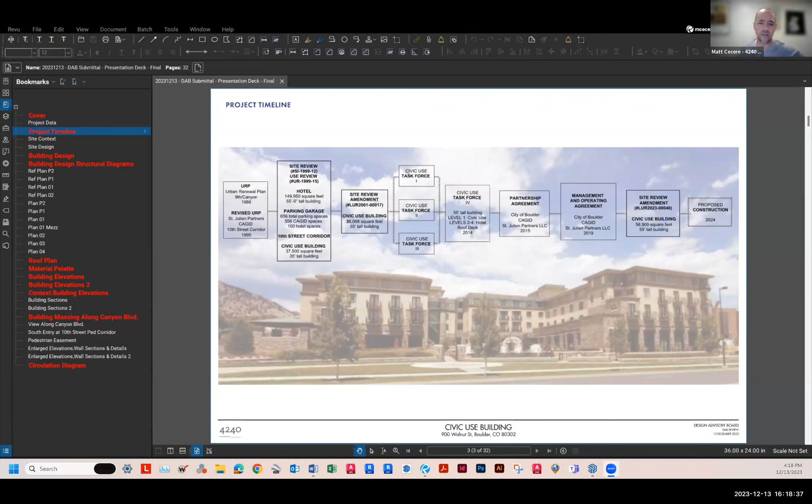So hopping into that a little bit deeper, we want to talk about the program. There's a lot of information here, but focusing on these elements, which is really just the program: the building is approximately 55,000 square feet with a 6,500 square foot conference room. Supporting that, we have pre-function support spaces like warming kitchen, restrooms, and storage at the ground level, and all of those are also being supported by the main hotel.

Above that, at levels 2, 3, and 4, the upper levels are 39 guest rooms. It's worth noting that the height of the project is identical to that approved civic use project in 2002 and in 2014, and that is 55 feet. That's the same as the existing context, and that level aligns quite well with connecting buildings and the urban design.

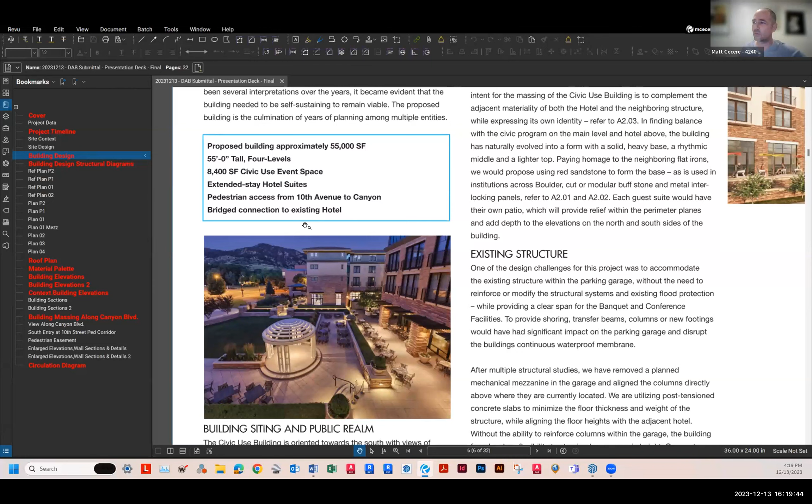So what we're showing here, we didn't submit this, but we thought it would be a good way to explain more about where we're coming from. This is nestled into the downtown urban fabric, and really what we're trying to do is figure out how to nestle into that fabric and work with the existing structure.

There are two major challenges we had to overcome. Looking at this structure, you'll see all these columns in the garage level that are roughly on a 28-foot by 28-foot grid. The clear span for the conference facility up above is quite challenging, so we had to come up with unique ways of dealing with that.

If you look at the diagram above, this is looking at the floor slab, or the civic pad that everyone can see today. What's worth noting is that we're in a flood zone. This is really the second key challenge, so how do we deal with that?

We've already dealt with that from the beginning, but we can't change that facade or access to it without essentially demolishing it—we'd have to restructure this whole portion of the garage. But we have maintained the existing connection at the 10th Street corridor, and we had planned for the civic use building from the get-go with an exit and entry here that we're maintaining for this design as well. So those two points are worth noting.

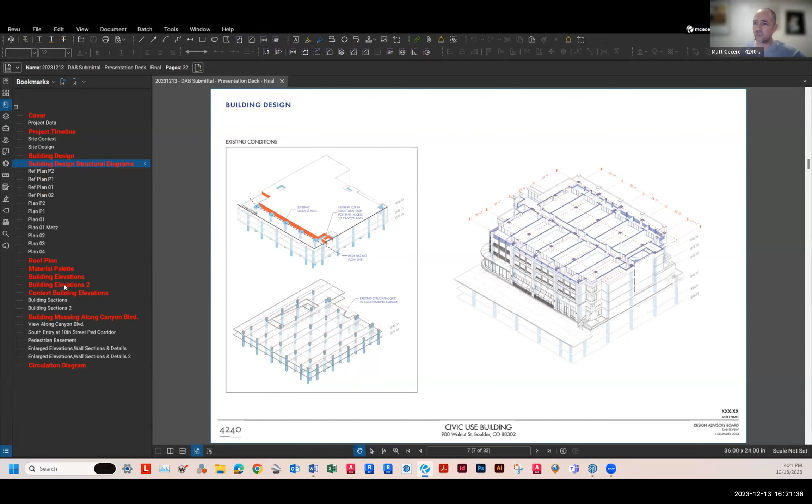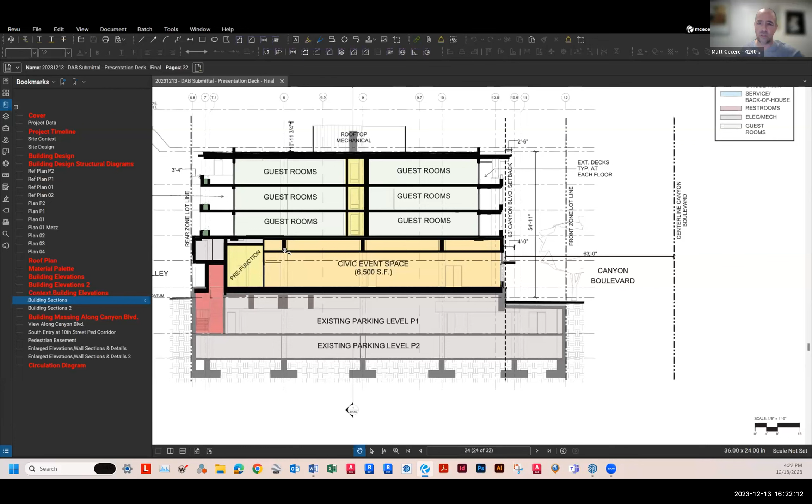I wanted to show you the pedestrian passage, this pedestrian easement here. Getting into this urban realm, we wanted to understand how to maintain what we have but enhance it. This passage has been very active over the years, but it's just had this concrete pad next to it. So we're looking at shifting that easement over and creating a really vibrant space—you can start to see this whimsical, dynamic arch passageway influenced by precedent imagery up above, which helps create this connection.

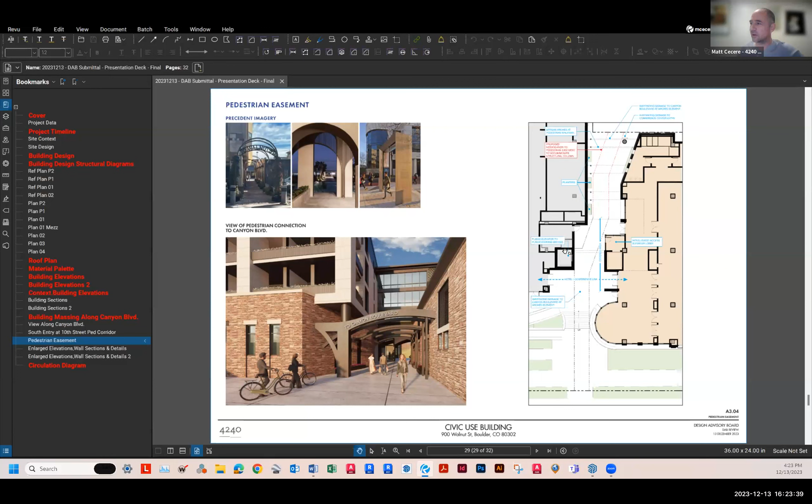This gap is articulated between the two buildings, creating a clear separation between the original St. Julien and the St. Julien Annex and Conference Facilities, the civic use. We're looking at this as a confluence of energy: pedestrians from Canyon Boulevard can come up the stairs, pedestrians from Walnut come here, guests from the hotel can pass across, and the public can come up through this elevator here.

I'll show that in a larger scale—you can see this diagram. If somebody's entering the hotel, they come to the lobby here, and if they want to go to the conference facility, they can pass outside undercover and come into the annex. Conversely, they could come through 10th Street, either side, come down, across, and into any of these entries depending on their purpose. Vice versa, off of Canyon, they can come in here too. That was something you requested of us, so we wanted to provide that diagram.

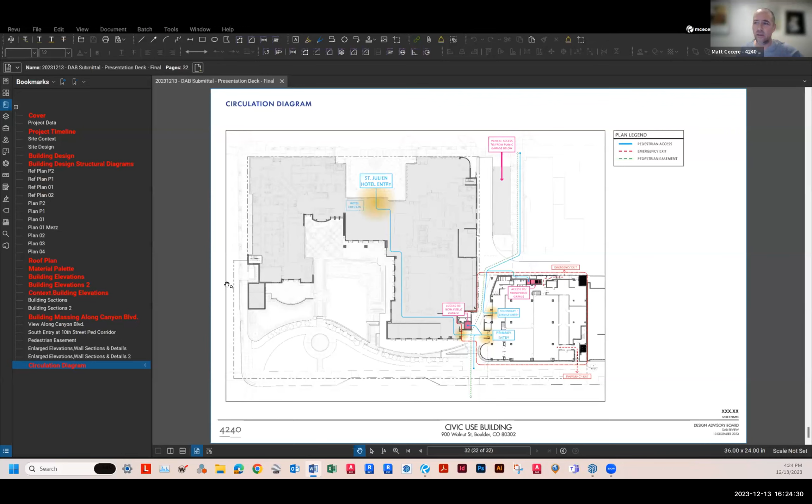It's worth noting that the primary entry is on the west side here. There are secondary entries, but they're really primarily for service and for egress. Now I want to move to building elevation 2.

Or I'm sorry, hold on.

The context building - getting into the elevation and thinking about the articulation of the facade, what we've been saying is we want to nestle this into the fabric and make sure that it is born of the site, born of the context. So I'm going to zoom in here and look at that context and elevation.

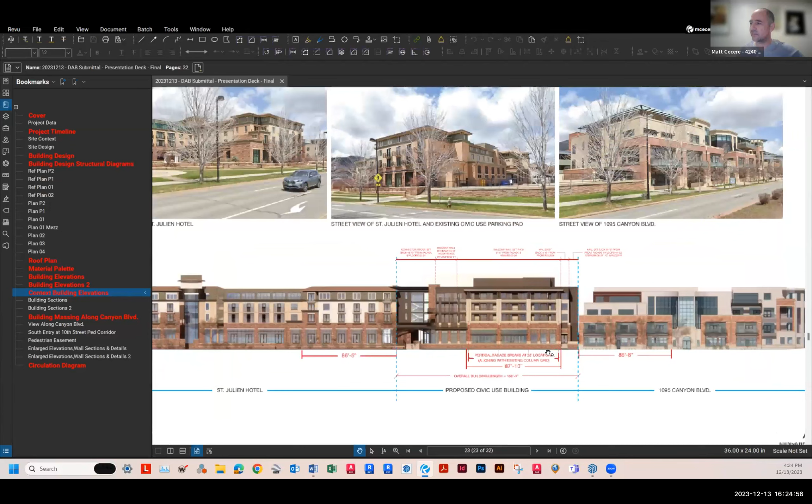So on the left is St. Julien Hotel. You can see a clear distinction between the base, the middle, and the top. And then the eastern neighbor has a very similar base, middle, top type of organization to it.

You'll see that there are 3 bays here that are 86 feet on the right and 86 feet on the left. There's a requirement to maintain 75 feet. We can't do that with the structural grid, but we're trying to stay in keeping with our neighbors. So what we have done is articulated this center bay that's about 83 feet, 10 inches wide.

You can see these step backs that we have. I mentioned that corridor on the left, that step back at the passageway. And then the balconies step back here about 13 feet. On the west, and then on the east, it steps back about 8'6". And you'll also notice, and this becomes important as we start to look at step backs on all sides, that we're stepping back on the eastern side to respect the neighbors' views.

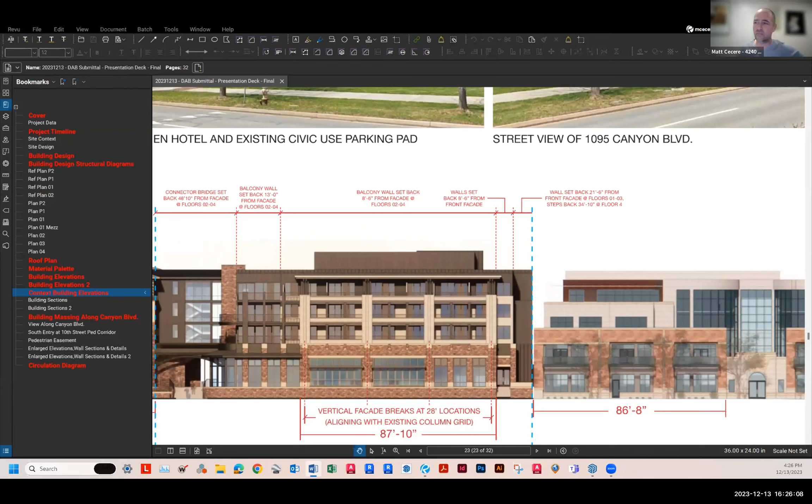At the upper levels of the north facade, it steps in a similar way. So let me show you that. Actually, I think probably the better view for this, let me pull it up. Sorry, give me a second to pull up the right one.

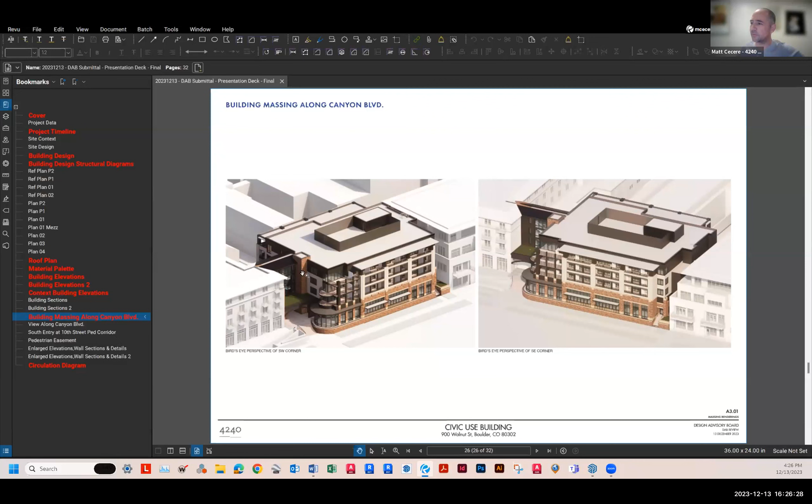This is just another view on Canyon Boulevard, both from the southwest and the southeast. And you can see how the building starts to erode away, if you will, for those setbacks to respect that. Also, you'll notice that this portion is a little bit more special because it's trying to signify entry. And then on the other side, we're stepping that back as well.

Going back to the north facade, this is a little bit hard to see in elevation. If we need to, we can pull up a SketchUp model and go through that. But you can see the stepping that we're doing here. It still has the base, it still has the middle, and it still has the top.

The base is largely utilitarian because that is the back of house along the alley, but we have tried to add windows and other expression that helps enhance the architecture at the base. And then when we get to the middle portion, that portion is stepped back - we add plantings, it's stepping back between 5 and 15 feet, depending on where you're looking at the facade.

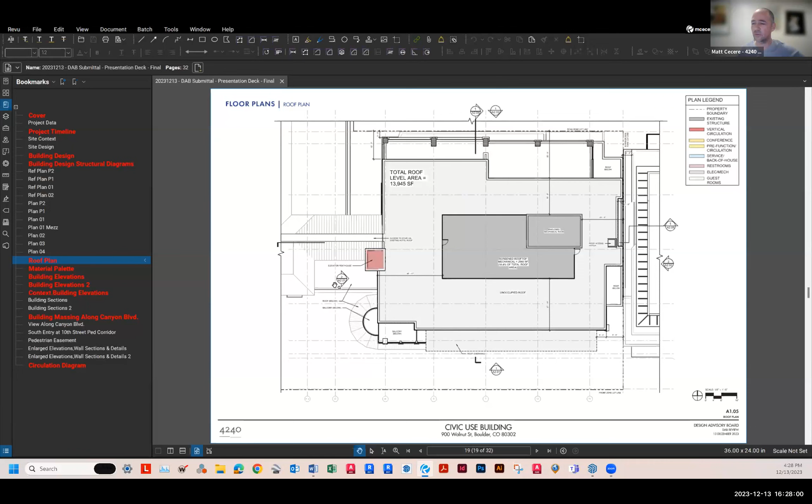It's either looked at honed or as cleft. And then at the top, we're looking at this metal panel - that's this zinc metal panel, again a very high quality product. So we really are enhancing not only with the articulation of the form and massing, but also with the materiality, this base middle top articulation.

And that can be seen not only on Canyon Boulevard, but this is really thinking of this project from all 4 sides, so that is even on the west side at the passage. And if we go to the next slide, we mentioned this already, but there's that base middle top on the north. I think it's worth noting that we're paying special extra attention to the east facade.

We're using high quality materials there as well. Where we butt up adjacent to the property line, there's a constructability concern. So rather than using limestone or metal panel or cleft stone, we're utilizing a high quality CMU, ground face and filled, so it almost looks like limestone, but it's CMU. That way, when we get to construction, contractors can build from our side of the property rather than the other side, with limited impact on the other side.

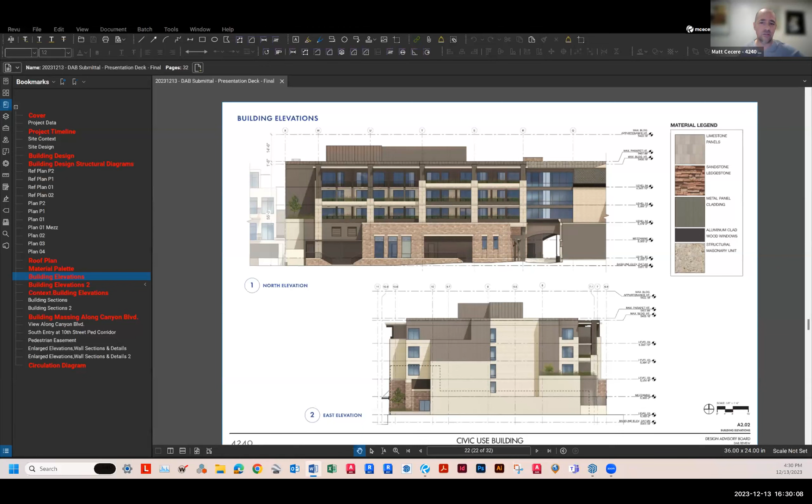So I think that is worth noting, and I think all of these enhance that base middle top. It's also worth mentioning again that in order to enhance the solar and visual access to the ground level, we've provided expansive glazing. We have this enhanced glazing, meeting the requirements, but perhaps even more important is that the conference facility is on the glass, and we don't just have glazing, we have folding doors, so you can open up that space and have that visual and also physical connection to the street.

And sort of the icing on the cake is that we're trying to introduce vegetation in the gaps where we have roofs that will be on top of the roof at the connector. I want to go back to the other view one more time. We also have that along the alley at the balconies and at the step back roof again. So I think that is worth noting.

Covering this at a high level, but for closing remarks, I think it's really important to remember that today's presentation is to focus on and address the design guidelines and how our building relates to those guidelines. In light of the recent correspondence from some adjacent neighbors to the east, we felt it would be important to provide some historical context and just wanted to briefly touch upon that.

This project was planned for back in 2002, and the project to the east was planned subsequent to that. Through their initial approvals, the building largely had a blank wall on their west facade, understanding that this 55-foot tall building would be constructed at some time in the future. Through their design review process with the city, it was recommended the need for a more articulated west facade, not knowing how long it would take for that proposed structure to be built.

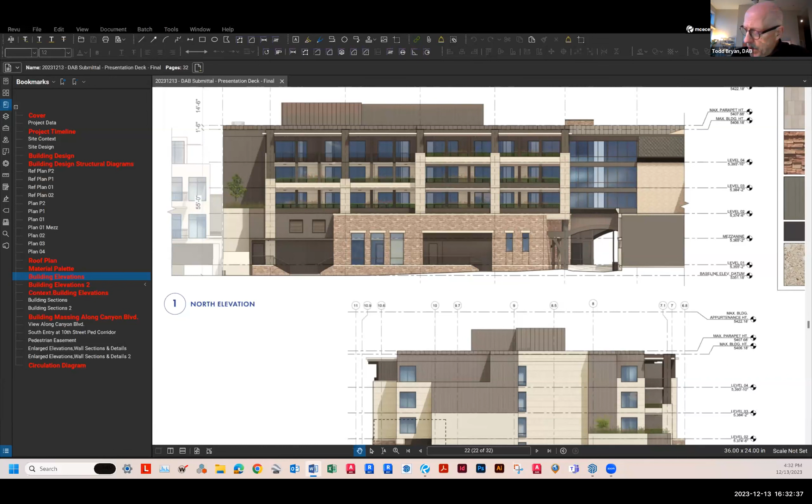Before we get into the Design Advisory Board questions and then discussion, I'd like to hear from the public, but before that, I think everybody probably already knows the kind of role that DAB plays. When I say DAB, I mean the Design Advisory Board. Just for review, DAB is an advisory board, which is kind of in our name, and we review architectural design features that are at the request of the planning board and the city council, related to criteria contained in the downtown urban design guidelines and the site review criteria. So that's what we review.

That's what Matt was talking about a little bit, going through this, is the kind of things that we're looking at, so we'll be discussing these as we go through, specifically two of them, but if other ones come up in discussion, those are ones we'll also talk about within our time frame. I think it's important to note that the DAB doesn't approve or deny projects. We really advise the staff and, in this case, the planning board on these design features contained within these guidelines. We also don't review engineering, zoning, or parks. But within the context of what we do review, we really welcome public comment, and to the extent we can, we'll try to address those comments within the direction we're given.

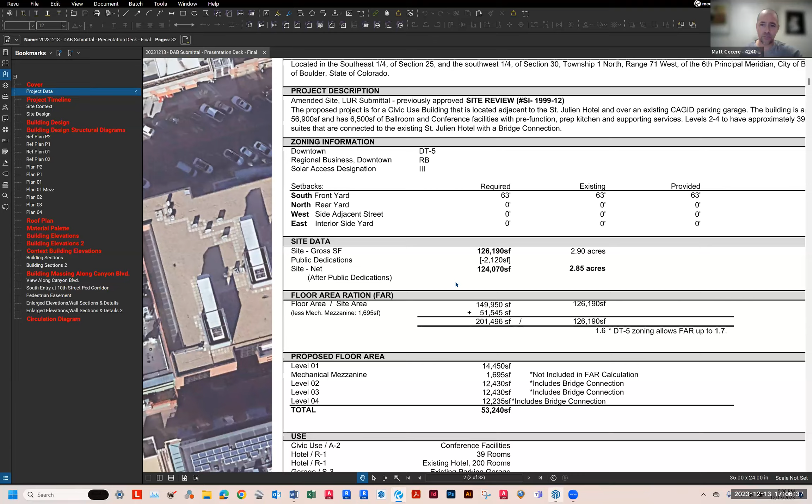Yeah, it's a little bit hard unless I pull up the screen, but essentially - do you want me to do so? Okay, sure, do that, give me a second. Let me pull up, I'm actually going to pull up our model and spin this around a little bit.

So this is the model. We grabbed your context and put that all into place. And what you'll see when you really look at this in 3D is that the building is set back wherever we can do it, so we have this corner set back. For instance, let's say a view from one of the terraces in that corner - they still get light and view. There's still a setback, even though we have the use by right to go to a zero setback.

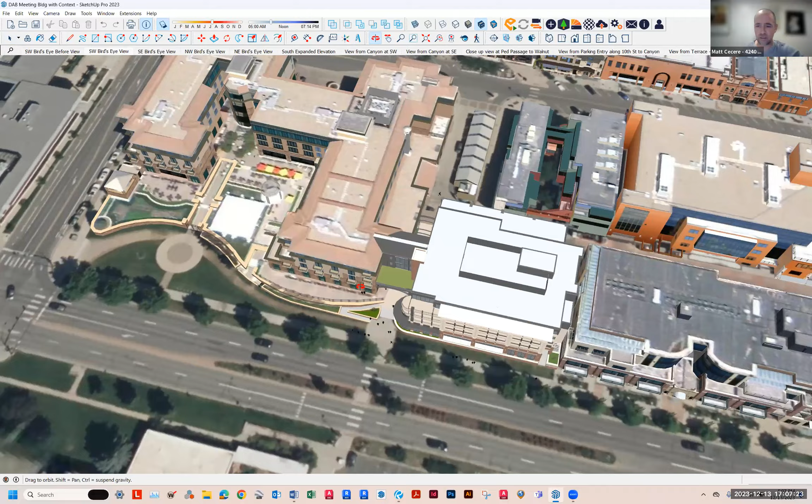So they still maintain a view of the Flatirons. They still get light and view. They still get ventilation, especially at the southeast and at the northeast corners where they are cut back to maintain those views and maintain as much separation as we reasonably can, given the structural complications we spoke to earlier.

And Matt, would you have any sense of how much you guys are giving up in terms of square footage and property value by not building out your full build out? That's a great question.

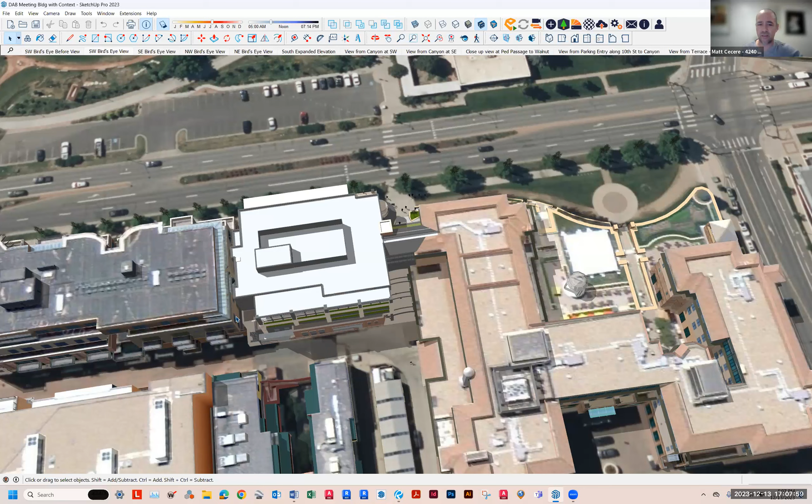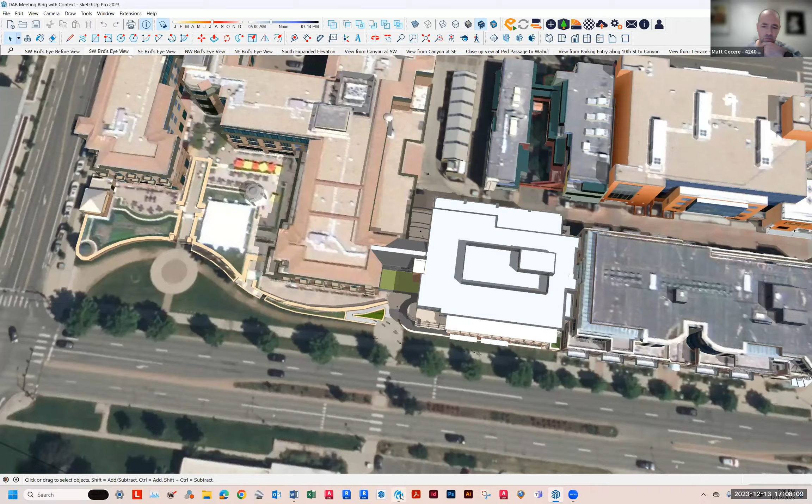We haven't - Jen is on the call as well - we haven't identified the exact loss of square footage, but Jen, I don't know if you have that off the top of your head. If not, I can identify those in plan here, or actually I'm going to switch back to the other diagram. I think this might be a little bit easier.

But you can see this corner is cut out here and then that corner is cut out there. If I were approximating, we're probably about 350 square feet per level on this corner. And it's reduced here - probably about 100 to 150 square feet per level at that corner. And then we're set back here, which is probably about 2 by 25, so that's 50 per level all the way up.

Okay, thanks, sorry I'm doing public math, Stephen. Sorry, I apologize, but that's approximately what we're losing by creating those setbacks.

Okay, great. Any other questions for Matt? Clarifying questions that maybe weren't picked up in the presentation or need more clarity from DAB?

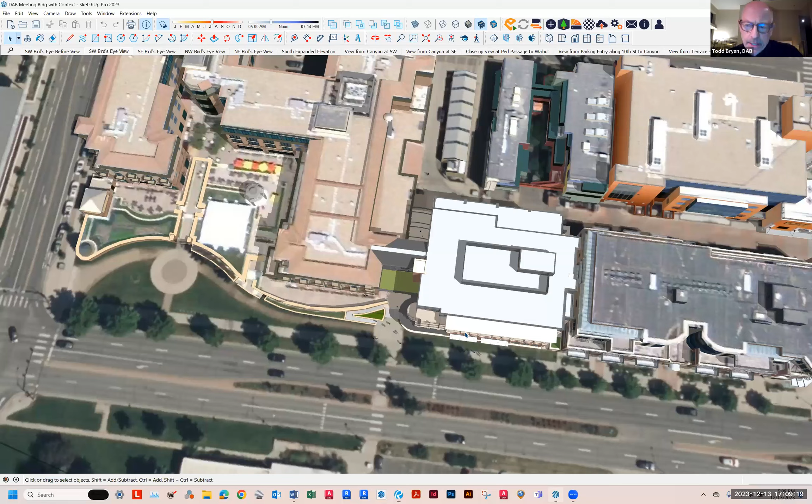I do have one question that Matt, you may be able to answer, but can you go back to that kind of roof view of your building and then the one to the west? Sure, okay.

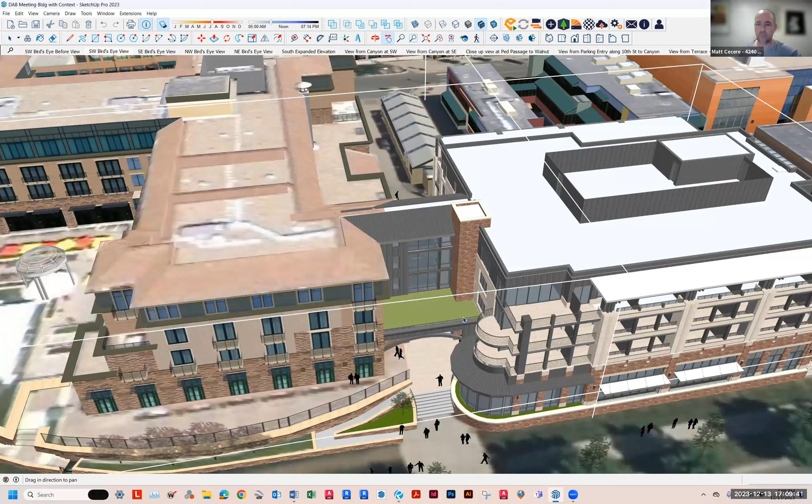Yeah, move over a little, keep going. I'm sorry, east - I'm looking at the roof view of the building on the east? Yeah, east, yours and the one east of yours. Okay sure, sorry, I got my directions mixed up. It's all good. It's a Midwest thing.

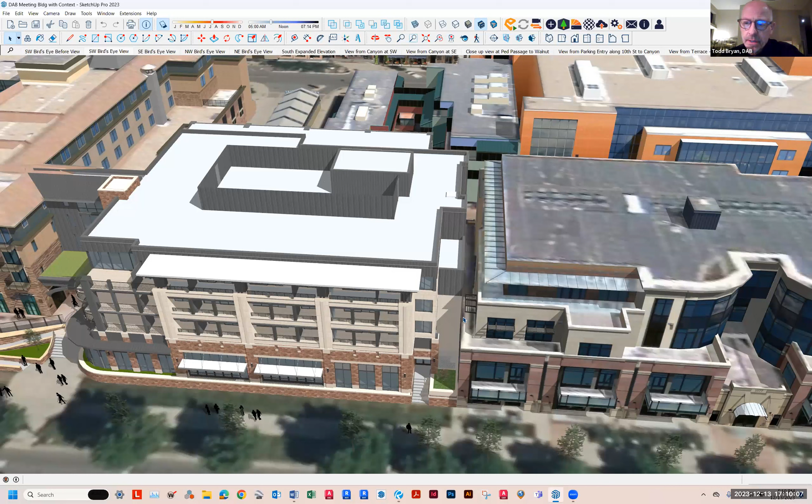So my question is, the units in this 1077 building - when people were talking about the potential impact, some of them were facing west, some of them were facing north, and some of them were facing south. So can you tell by the roof, are there units basically facing north and units facing south? Are there just two units per along that floor plan on their building? In other words, is anybody only facing west?

Is it that one? I do not know the answer to. Bruce or Jen, I don't know if you know if there's a unit centered along the west that's only facing west.

I have not seen a floor plan for levels 2 and 3. I've only seen a few of the commercial spaces below, and I do not believe any are fully west facing, but I could be incorrect in stating that.

Okay, great, thank you. Any other clarifying questions from DAB?

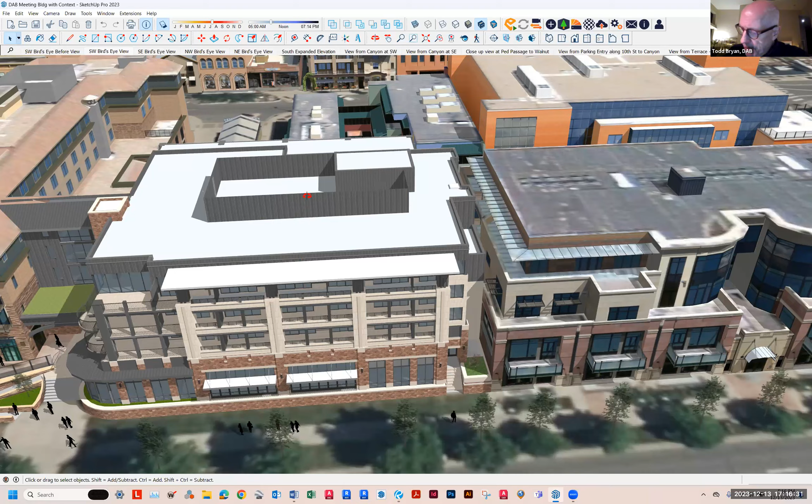So we have two issues that we've been asked to review. The first is Downtown Urban Design Guidelines 2.2C, regarding the maintenance of human scale rather than monolithic or monumental scale, on the south-facing facade. The other issue is the site review criteria regarding entry points that are not within 50 feet of each other.

But before we get into those two, I'm wondering if DAB members have other criteria they would like to discuss that they think are relevant to our discussion?

Yeah, Todd, I do have one comment. I think to answer your question, there was some attention and description of the alleyway facade included in the applicant's presentation, but I do think as we're walking around we have two main issues to cover. If we can just have a brief discussion about circulation as it relates to the alley side, mainly for pedestrians, I'd like to get a little more familiar with how people are going through this circuit, diagonally through the buildings there.

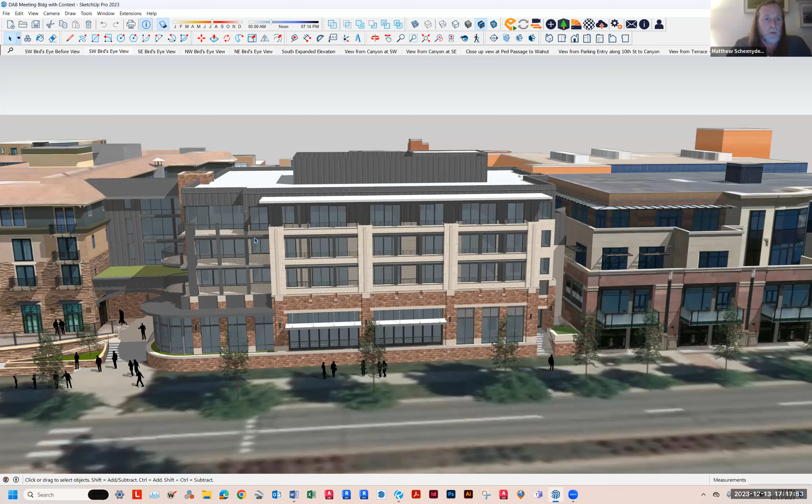Not being completely familiar with the backside of some of the architecture just north of this proposal, I think it might be helpful to get a walk through the model and understand how that works spatially. But again, in terms of material and massing, it seems like adequate attention has been given to that facade as a principal facade, not as an afterthought.

Okay, any other specific criteria that the DAB members think we should talk about? I have two, and I want you to tell me whether you think they're relevant. One is 2.2B and the other is 2.1B in the design criteria. Is there a way that we can pull up those two criteria? Is that from your side, Todd, or did you want us to pull that up?

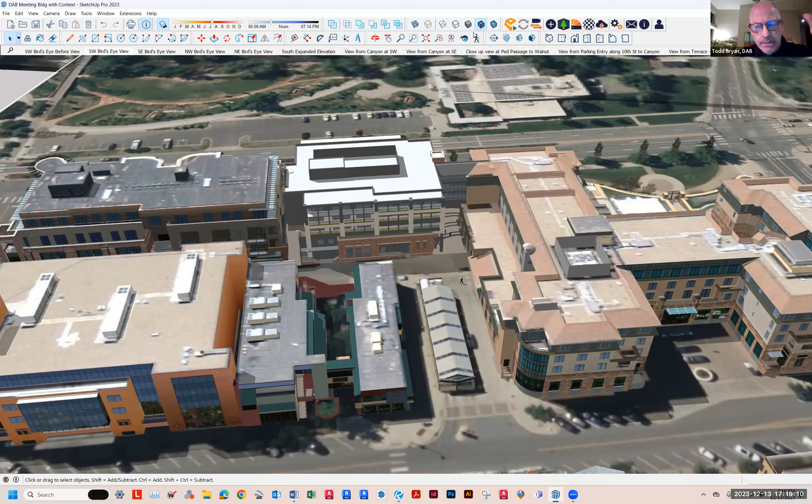If you have the design criteria that's actually in our packet, do you have that? Or Jen, can you pull those up? I'll stop sharing. I do not have that packet up, I have our checklist pulled up, so let me look for that document. Or Shannon, is that something you'd have readily available? Pull that up. Thank you very much.

It's giving me, I'm having it load right now, Todd. So if you can continue on the other ones, I can still pull it up.

Okay, so while we're pulling that up, if it's okay with DAB members, I'd like to start with the second issue we're being asked to review, regarding the defined entryways. Matt described the constraints they have regarding the building and the floodplain, so that these two entryways at each end of the structure are more than 50 feet apart, under criteria H3A, Roman numeral 4. Are DAB members comfortable with that added distance, or do you think there's another way to do this?

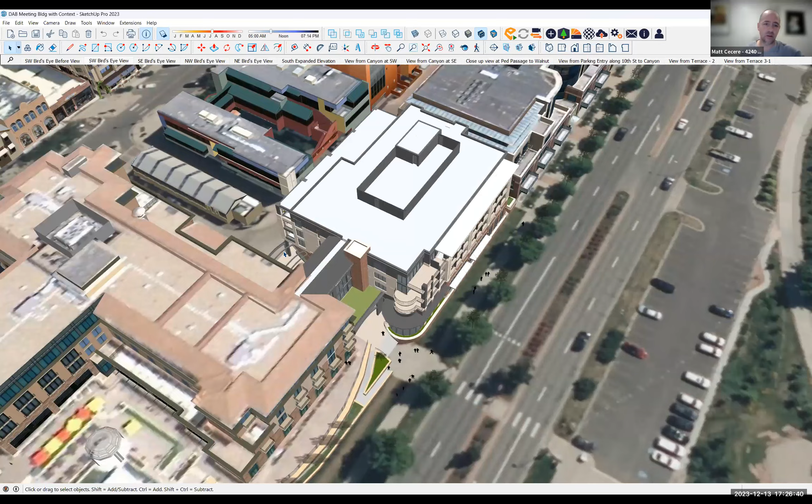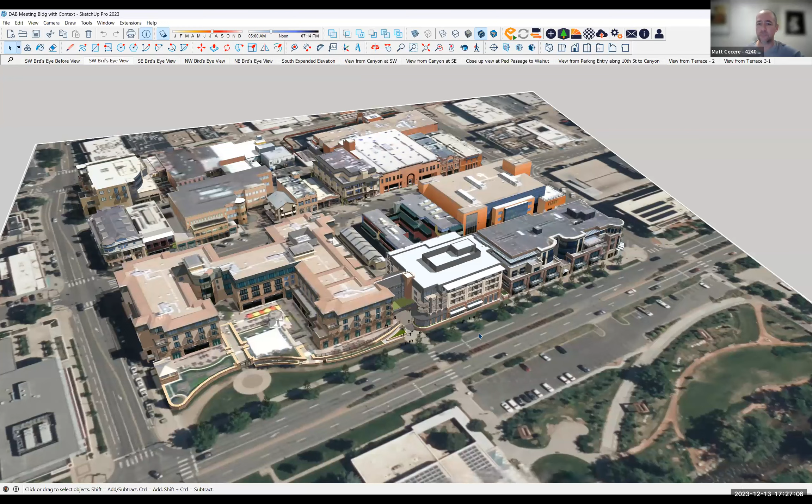And I'd add, Matt, that if somebody were taking an Uber or Lyft or rideshare otherwise, they would be dropped off at the St. Julien, or perhaps further down Walnut. There are a few options. I mentioned there's sort of a spaghetti of circulation, but to Jen's point, there can't really be any car access off of Canyon. It's simply perhaps pedestrian crossing Canyon or coming along the sidewalk. Okay, thanks.

Yeah, and I just wanted to add that it's interesting the way Boulder has interpreted flood rules, because while they are federal rules, they're mandated locally. In other words, the local municipality actually has jurisdiction to override some of them, and if there were certain circumstances, they could do that. Hence New Orleans, right? You would have nothing there. And so if there are moments that wanted to be done and you guys wanted to push for that, that would be within Boulder's local jurisdiction. They've been reluctant to do that in the past. They sort of dig their heels in the ground with floodplain issues, but that is within our local world if we wanted to do certain things.

So getting back to the question about these two entryways, DAB members, are any of you uncomfortable with the distance, or can we put that one to bed?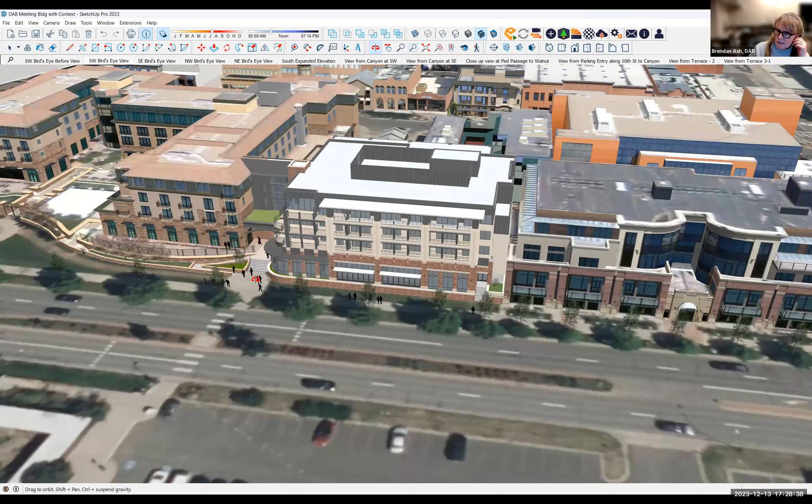Well, I think that there are a couple of questions within that question, not just the distance of the entry. I think that the entry that's on the east on Canyon is primarily egress. I think it is appropriately set back from the street. It's not a primary entrance. It's not something that we want necessarily people to be drawn to as an entry. I think that having that curve feature and the wider stair is inviting to where the entry naturally wants to be.

The only concern I have is there's that roof element that's happening, sort of setting up the arches going down that promenade, and it's kind of created a spine and a wall that's severing and blocking, maybe hiding the entry doors. I'm wondering if there's a way that that spine wall could be shortened, or the doors could be pulled out so that they're more visible, so that if you're coming around that curve, you could actually see where the entrance is. And there's 2 sets of doors there. It's a little bit confusing.

I think that sheet R1.01, the site plan, shows the 2 sets of doors, but the double doors are definitely more prominent than that single door, yet it's kind of being hidden by that spine wall. So I would suggest somehow making that, is that roof element necessary? Is there another way that could be treated as celebrating the entry to the civic space instead of blocking and hiding it, but making it a little bit more prominent?

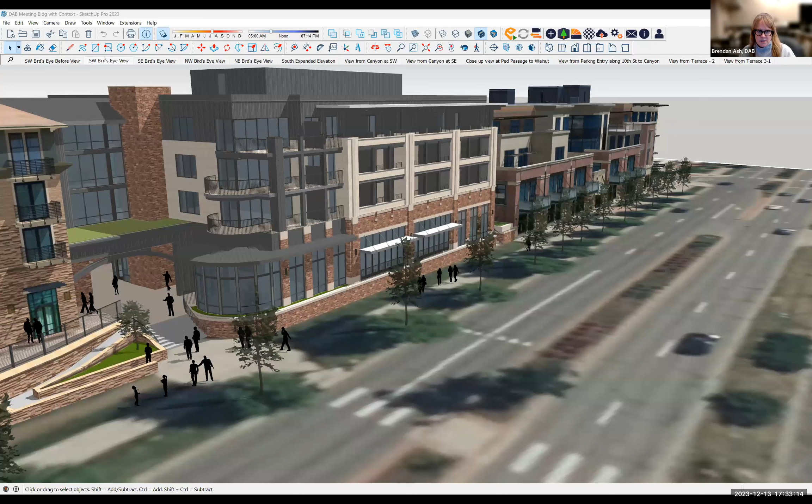I'm talking about the south side, underneath the operable doors and windows with the Juliet balcony. With the white awnings that we're looking at sticking out in the floodplain, that straight flat stone wall sitting underneath the window bay, if there's a way to bring that floor line down, tier it with additional landscaping. Right now it's just showing a patch of flat grass. I'm wondering if there's some way to integrate the planting beds like you can see on the St. Julien side, just west of the stair.

I don't know how to draw on this, otherwise I'd point it out. Can we draw on this? There's the annotate button at the top. So it is drawn. Oh okay, it is. How do you do that, Stephen? Where did I see it? At the top, it said annotate. Of course, now I can't clear it.

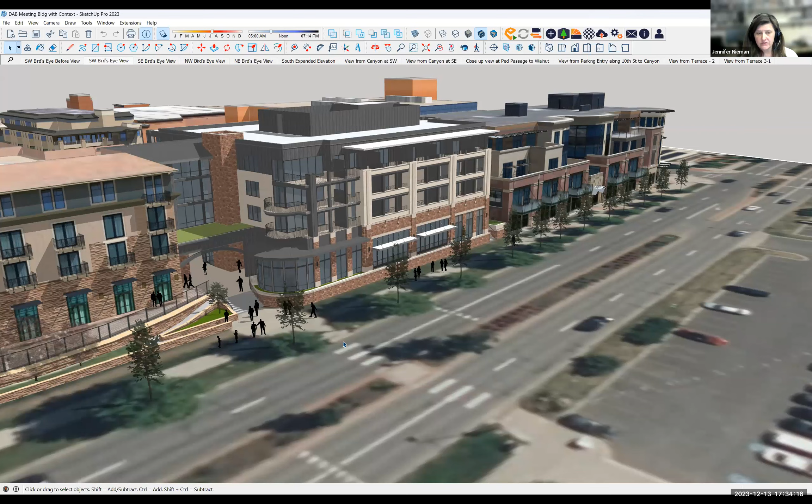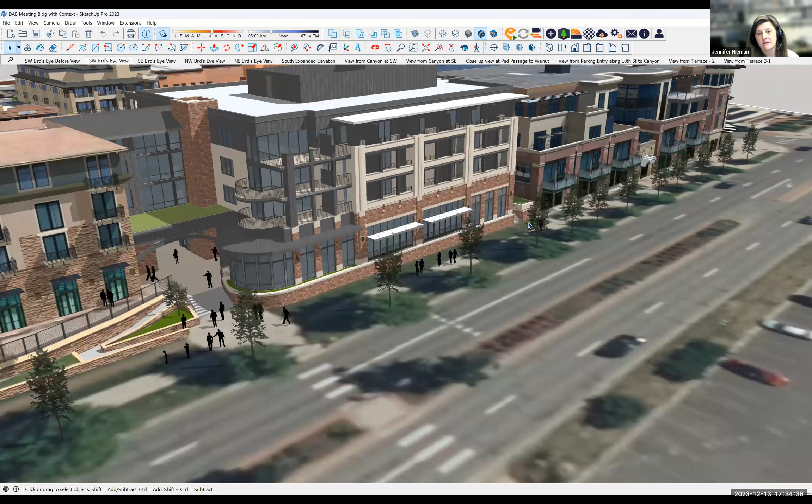So that is considered the high hazard zone. We have reached out to traffic and researched what landscape would be available to put in that area. We were told we're not allowed to plant anything that would disrupt floodwaters. So we might be able to get away with some minimal grasses, but shrubs and lots of plantings, I'm not sure if that's something we'd be able to do. With regards to fixed planters, we've talked internally about stepping back windows a foot or so so we could have draping plants that go over that wall in that corner. How can we articulate softening that corner with more of a landscaped edge, but we're very limited on what is allowed within that turf zone along Canyon right now, based on the high hazard zone.

That is something we're looking into, just to help break up that long wall. I'm looking at this nice landscape island - if that was possible to have some type of tiered landscape bed to break this up. This wall is tall, and compared to a human, it's a big wall before you start the engagement here with these operable doors and windows. And then you have this planting bed, which doesn't have the same kind of human scale or interaction or whimsy that I think is really working with the St. Julien.

I would like to see maybe something like these planting beds over here pulled into this. This is pretty high up - it's not really something that people on the sidewalk can experience in any way. It's almost a story above your head. So I would like to see that maybe revisited.

That corner of the building is existing. That is parking garage below. Just to be clear, Jennifer, on Google Earth we can see this - the stone wall and the cast cap already exist, and that is essentially the deck of the parking garage. So that is structured below, correct? That is correct, that's right.

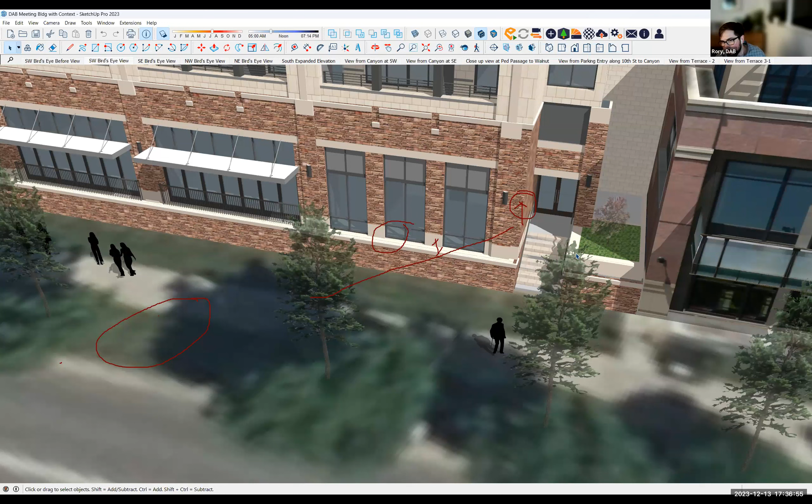But that was conceived for the original one when it was built in 2003 and 4. Are there any additional voids that were anticipated along that facade? No, there were voids for elevators further in the back, in close proximity to this one. And if you go down into the garage, you can see a lot of what's going on there, but nothing along the street.

So just for a second, I'll pull up the diagram that I showed earlier. This is really the only structure, so you can see that carve out for the stairs, and then this carve out here. Can you go ahead and stop?

Can you reshare? Oh sure. We're still seeing the model. Yeah, let me share the screen. Hopefully that will work better. Let's see, does this work now?

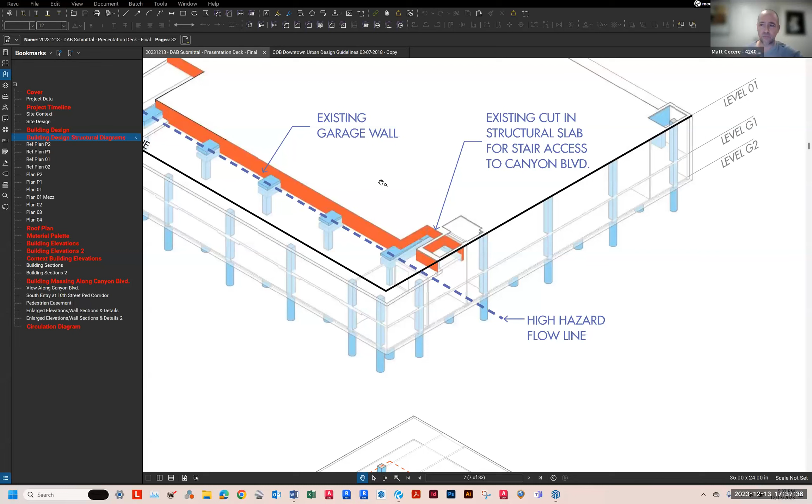Yes, okay, sorry. So these are the structural diagrams I showed earlier. That's the floodplain wall, if you will, and you can see the notch out for the stairs on the west side, and then this is a notch anticipating the stairs that we're talking about, and this cutout here is really for the garage exhaust. So if I go back to the other one, and let me know if you lose me on it, that is what is here.

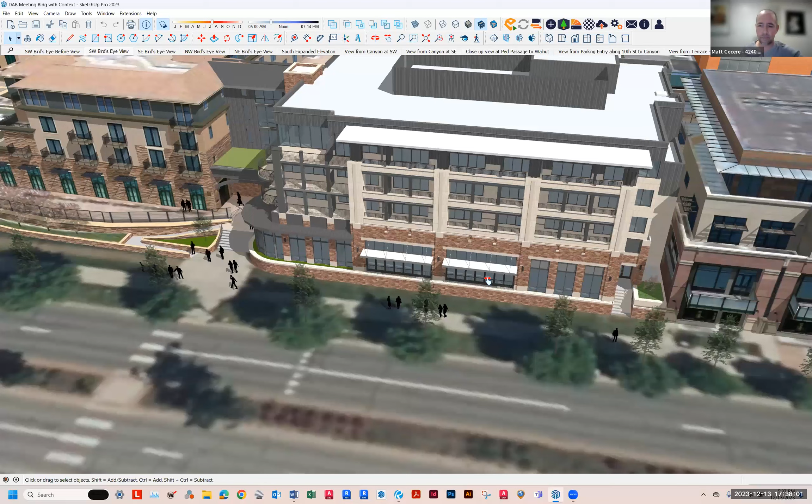So there's a question about garage exhaust. These are here, we're not moving them. We're working with them, and we actually saw it as an opportunity to help set the building back. So that is there, and then we have the planting in front of it.

One thing, Brendan, that you brought up is is there perhaps a way to lower this planting? So that's something that we can look at with our landscape architect and see how low can we get it and still make sure that the vegetation can thrive, but it's essentially sitting right on the slab.

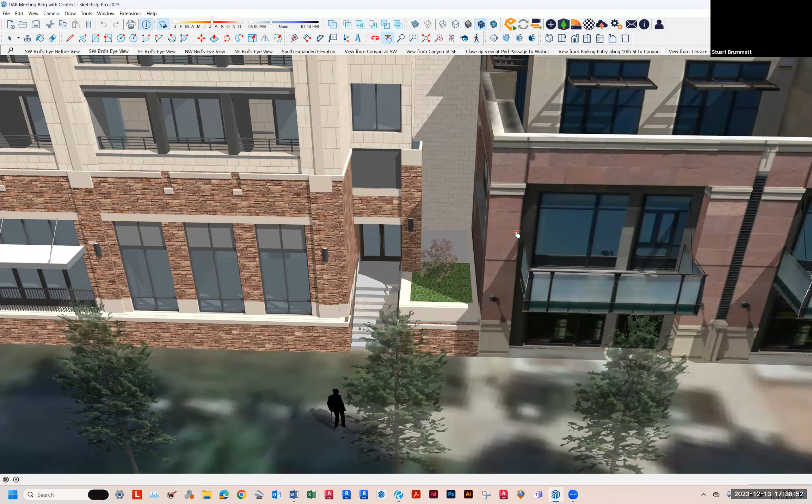It might be worth talking about the entry and how we've already internally discussed how we can improve the primary entry, and what we might do at that location to increase the intuitive nature of what entry is and where it is. We've talked about maybe introducing a vertical element outside of that fin wall you were discussing, a pair of, making that a double door, and maybe even paring back the curved room form so that that's not blocking the entry as much.

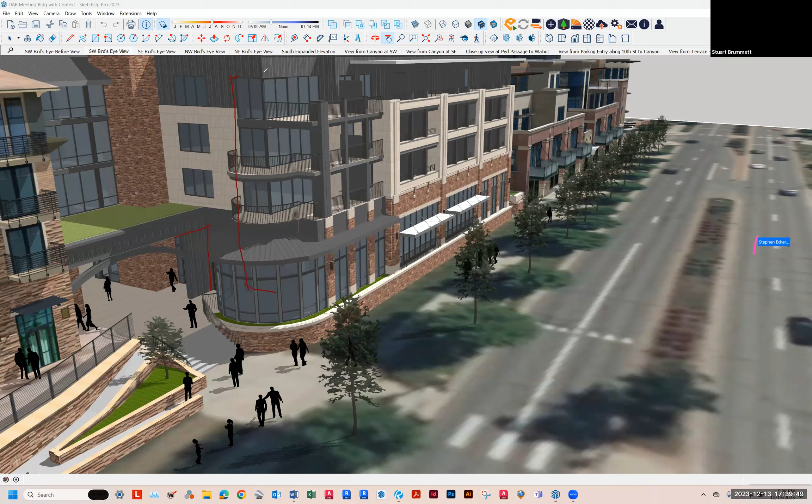And that is definitely something that we have been looking at, and we'll continue to do so. We agree that there's an opportunity there to increase the visual nature of what entry looks like outside of the covered roof, so that as you're coming along the sidewalk or canyon, entry is clearly denoted by the architecture, and that is something we will definitely be working on as we take your comments and make modifications.

All right, you're speaking my language. I like it. Yeah, Brendan, Stu, thank you for that. Brendan and the rest of the DAB, I'm doing these cartoon sketches, but we agree that this fin wall isn't ideal.

So subsequent to this, we've looked at strategies, as Stu has mentioned, to eliminate that. We're also looking at this vertical expression. One thing we're debating internally, we're not quite sure what the right answer is, but Stu alluded to it, is should this semicircular volume be so large, or if you can imagine in plan, here's the exterior wall, maybe this vertical expression comes through and this goes over, and then this zone can become outdoor space that invites people in. We're not quite sure, but it's something we think might be a good fit.

What we're trying to balance is what one of you mentioned earlier, that this expression signifies entry, and that's part of the reason why we did that, but it also blocks entry at the same time. So we're trying to find the right balance of signifying entry, but making it welcoming and open.

Yeah, I wanted to make a couple suggestions along the same lines. You could look at, and I don't know that this would help, but you could look at this roof actually, and this all sort of being one expression rather than so many parts and pieces. That could help designate that. And the other thing I thought I had was, could there be a way that some of these columns materially come down to help break up that wall?

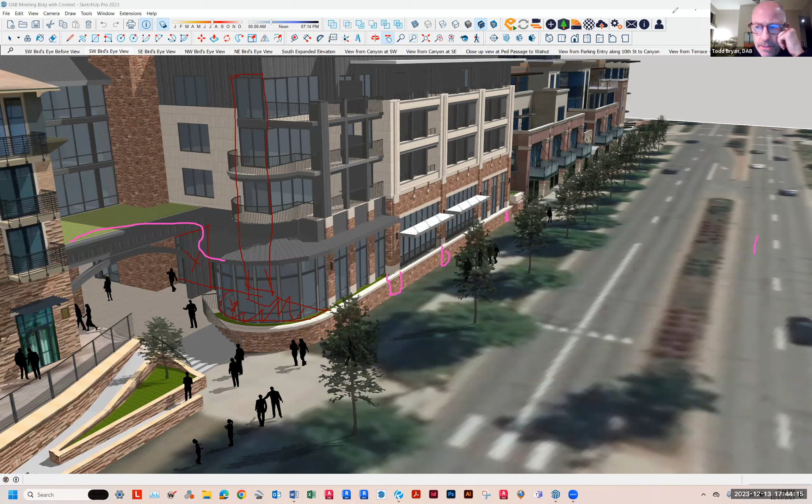I think you guys get the idea that's being expressed. Also, I really was wondering where the outdoor use space is for the Civic Center. And I think the idea of making the arch an exterior space instead of interior spaces would be a very interesting thing to explore. I think if you can spare the space programmatically from the inside, it could be a really cool balcony that's more engaging, but still giving that flow to the entry.

Okay, so is there a potential outdoor use space associated with the arch? Yeah, with the curve and the arch. Okay, so I would like to move on to this other question, because I think that's going to take more time, and we're at a shortage of time at this point.

I don't know if Rory or Matthew want to weigh in on this particular issue, or are you guys good with the recommendations we've come up with? I think I'm good with it. I mean, the distance of the entry, I don't think is really detrimental to this particular facade and its location. I think the fact that the east is actually egress driven is actually a benefit to the residential folks, because they're not having congregating right outside the residential piece.

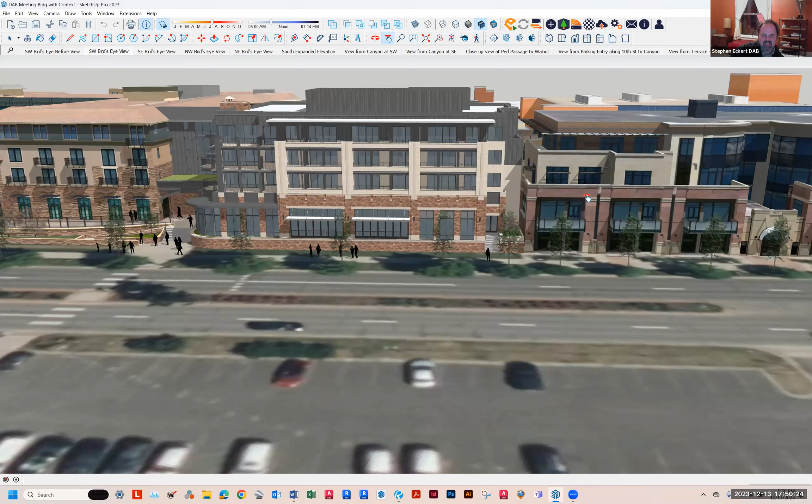If you could go back to that oblique view you were just at. Rotate it back. Yeah, right there, that's good. I think there's maybe a reaction to the massiveness of it, and honestly I think it's the way you've treated these balconies and these columns.

I think it could be more delicate, kind of the way the St. Julien has these balconies. I understand why you want balconies for these units, but I think it feels a bit massive. I'm not saying you have to follow this datum of the Arete building, but in some ways, if you did that and had the first level not having railings, and brought over this element from the St. Julien into this facade, I think it would push the building back from the street a little bit.

You'd still get your balconies, and they'd actually be cheaper, maybe. I think it would tie the St. Julien back, because this really is a continuation. That's just my thought. But I feel like it's especially these four big, massive, heavy columns that are flush with this front part that's making it feel massive.

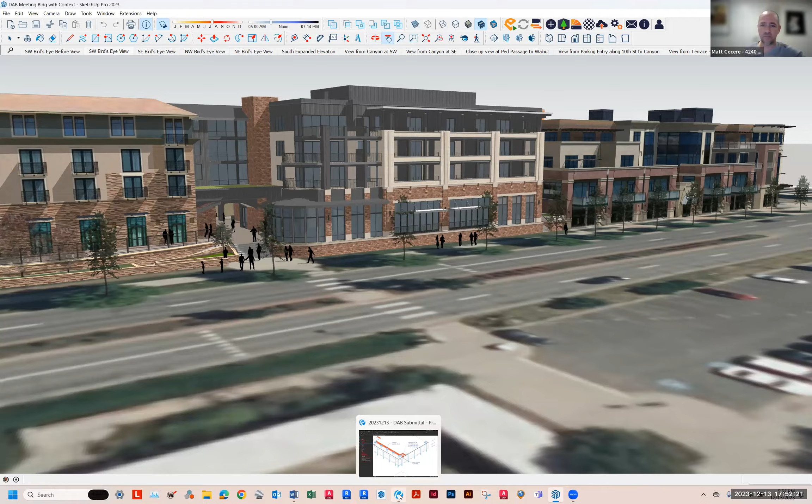Stephen, in DAB, do you mind if we explain that one? It's interesting because of the structure. Do you mind if we pull up something for that? Can you see this diagram on the screen? Okay great, so this is that facade where you have those frames, and this goes back to the structure yet again.

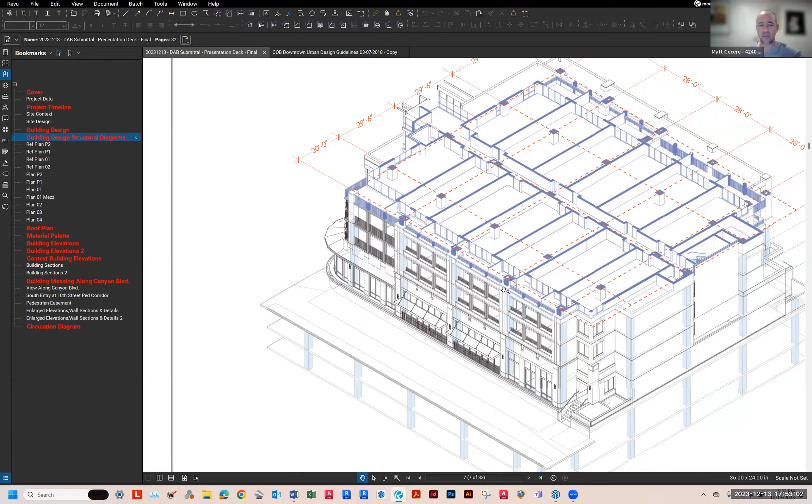So when you look at these structural grids, imagine these red dashed lines are essentially the beams—this will be post-tension concrete, but that's where the cables will run. There are columns at these four points, and this beam needs to extend to each of these columns, with a perimeter beam along the facade. I also wanted to show you the challenge: we have these columns, the facade is set back to address those setback concerns, but we're limited because of where the columns are located.

So we're trying to make each one of these columns slightly different. You don't see that on the facade, but when you look at the structure, you can see how we're reconciling those. So that became a great structural concern. There are some opportunities, for instance, on the corner, in theory we might be able to add a balcony, but that really doesn't take us in the right direction.

So what we said is, St. Julien is clearly a monolithic building. It has a base and a top, but is relatively flat. It has some projecting balconies that are light. The Arete on the east is more stepped back. It has carve outs, but also has projecting balconies. Can we marry something in between?

So we tried to take the tone of the stucco from the St. Julien and from the Arete and blend them together. So we're using the limestone, but then we made these very large openings, so it still erodes the mass as much as we reasonably can. We've had a lot of conversations internally about how narrow we can make those columns. We might get a few inches, but not much, because of the concrete columns that they're cladding. So I don't know if that helps describe the challenges that we have.

Yeah, yeah, that's really good. I mean, yeah, I totally echo, Stephen, what you were saying. My initial reaction was the same virtually.

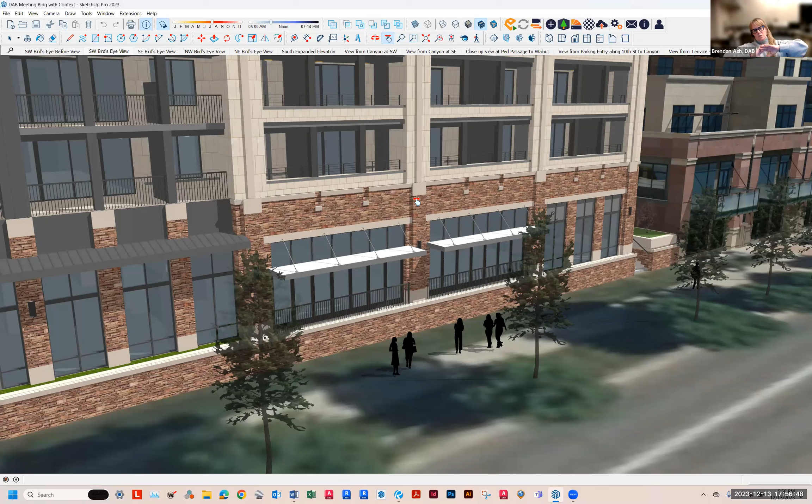For example, when you have a section cut through the balconies on the submittal packet, the detail blow up of that section cut doesn't have the stone, the partial height wall with the shorter balcony rail on top. It's actually more transparent rail. I think there's a tricky and weird transition between the cap of the stone at the base and where those balconies begin, that they're really almost in the same plane, and there needs to be more separation and more relief. Maybe looking at extending the balcony all the way down to the cap of the stone might help separate those. When you zoom out and look at Canyon Boulevard, there's a really nice horizontality along that whole street that is working, but there's sort of a lack of commitment once you start going up into the second stories, because it doesn't have even a slight bit of relief between the two facades, I think would be helpful.

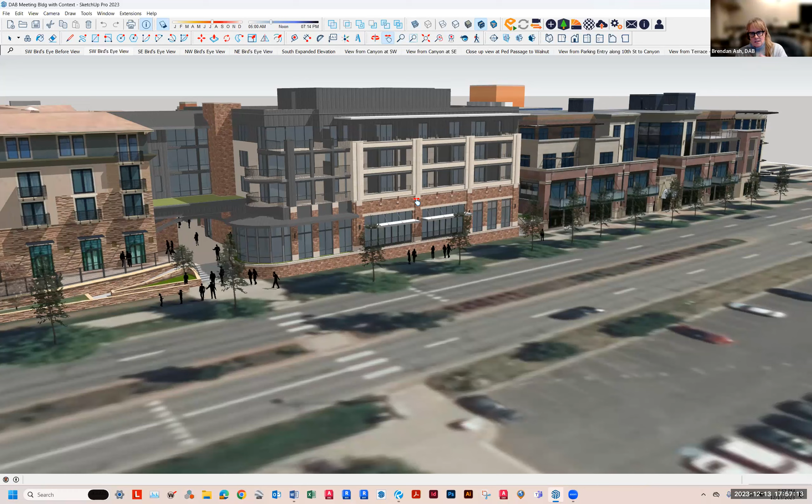Yeah, I mean, maybe did you guys try round columns? Not ornate, but just really simple round ones. You might be able to capture all of the structure you need within the round column.

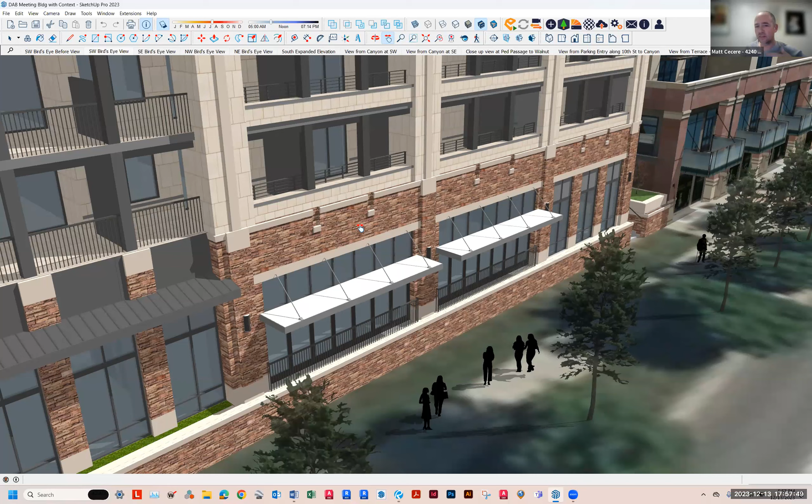Yeah, I don't know, I mean you guys are struggling with this, so... I think both of you are bringing up great points where, as I think maybe Shannon mentioned at the beginning, or perhaps Kalani, I can't remember, but we're early on, this is where we are. And I think there are good points about how much relief do you really need. Is it 4 inches? Is it 6? Is it 2 feet? Should this railing come down? How do we make it lighter? Can the columns get smaller, whether circular or chamfered, or notched, I guess. I think those are all things we have yet to really dial in, but they're really good points.

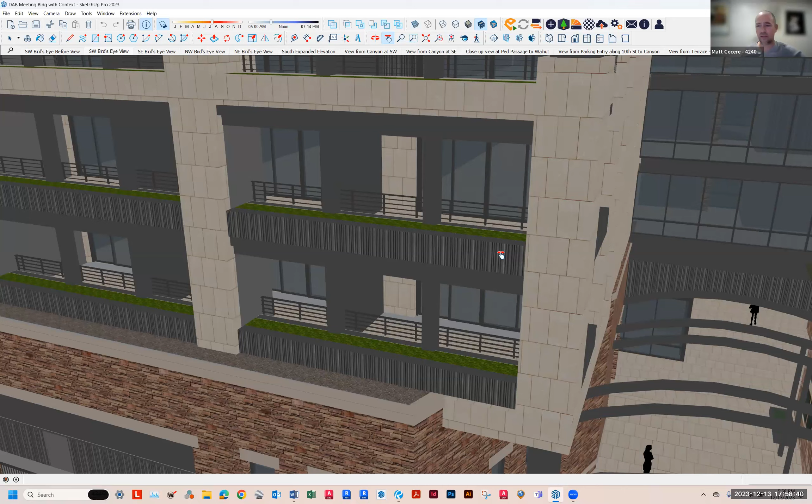This is sort of a question about Canyon, but one item we've done on the alley—part of what we're trying to do is not make every facade the same, but make them part of the same family. On the alley, we have these planters, and we have zinc that might break down that frame, maybe make it lighter. I don't even know if that's a good idea, so I'm throwing out a crazy idea, but it could break up the frame so the larger frame reads heavier while the zinc helps it recede and feel lighter.

Those are some ideas we're kicking around internally that we haven't gotten to yet. Sure—if you could pull the face of those columns to align with where the stone walls are now, and then treat the stone below the railing differently.

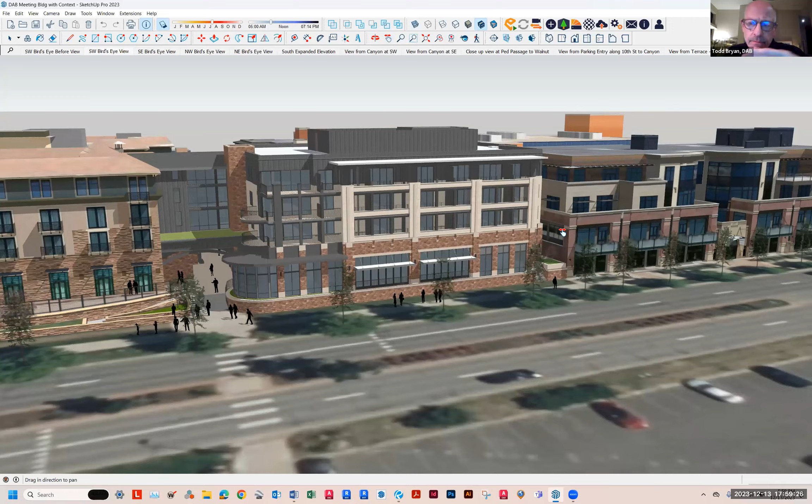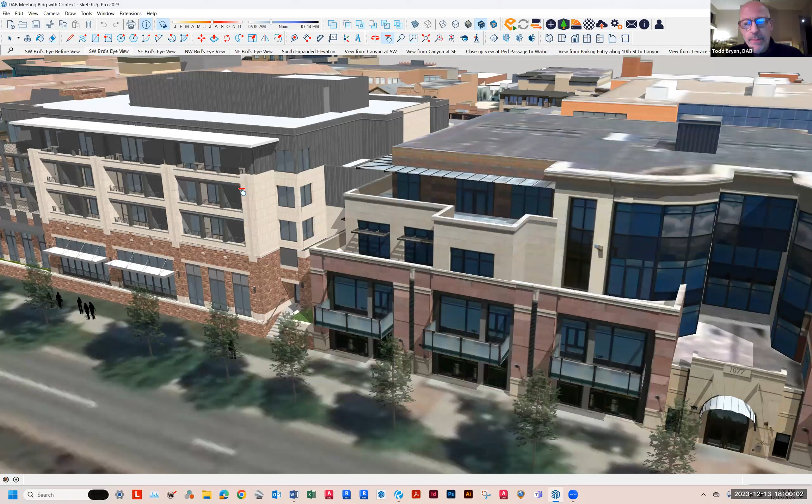Matt, I have a radical question for you, since you mentioned trying to blend these two buildings. The building to the east has these cool setbacks going up to four floors. So is it possible you could maintain the integrity of the columns you have, that form this kind of structure of the building, and do setbacks like the building to the east—floor by floor, you give up the lead column and go to the back column, so you're stepping up once or twice to get to the top of the building.

One of the things that makes this look massive to me is that you've got this solid wall, and the building to the east really breaks that up, not only from the front but also from the side—it does the same thing from the side. That's a clear-cut architectural feature we look for in almost every building we're reviewing. Your columns may limit that to some extent, but I'm wondering if that's possible.

Can I just interject, Todd, because I think this is relevant—the building to the east is a residential building with a residential penthouse. These are hotel rooms that also programmatically, not just structurally, need to stack.

So I'll do what I do sometimes here to make things more confusing for everyone, and disagree. I don't think we should be dissuading people from having a strong facade, or a facade that uses a minimal palette, over adding more materials and decorating small episodes here and there. So for a different point of view, I wouldn't go to great extremes or advise the applicants to start chipping away at the massing of this building. It is hotel rooms, they need to stack, and there's a certain monotony to that program that requires things to have this vertical presence.

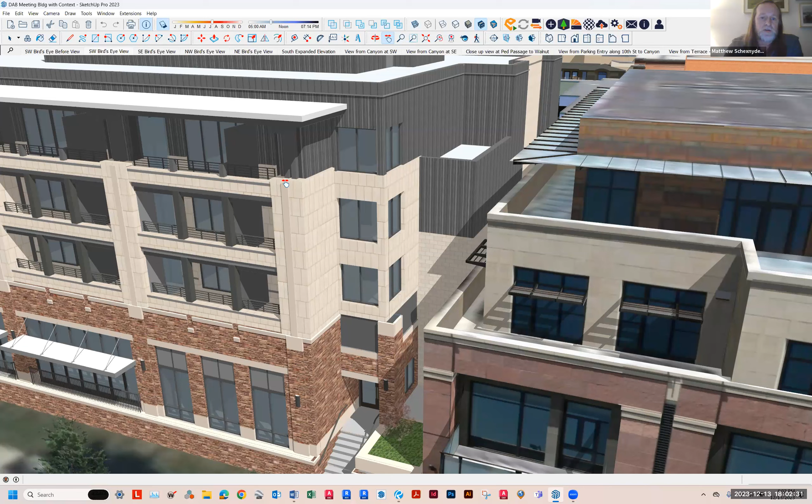I don't think our precedent would be—I would hesitate to say take as your precedent the residential building next door and draw from that. I think you have to favor more from the St. Julien—that's part of its complex.

I think the technical question we're looking at here is to opine on this 55-foot limit, which is enshrined in the design guidelines. And I'd say this is an example, both practical because of the structure and visually, where I feel like the 55 is an arbitrary number.

What I think is important here is there is a strong rhythm. The St. Julien has a very strong rhythm as well—you can see it just there to the west. This is a rhythm with different elements of architecture, but I want to speak in support of having—it's okay to have a strong massing sometimes. And sometimes the contrast of a strong massing next to a building with an eroded massing is a nice relief. So, yeah, those are just not so organized thoughts, but that's some of them.

Yeah, I tend to agree with Matthew. An older iteration of this board used to always harken back to the Hotel Boulderado, and talk about how if you were a historic family moving to a Western town, you built an edifice that occupied the block—you didn't shy away from it or try to make it cute and break it into little mini storefront facades. You owned it, and there's kind of a lacking building stock that continues to honor that tradition.

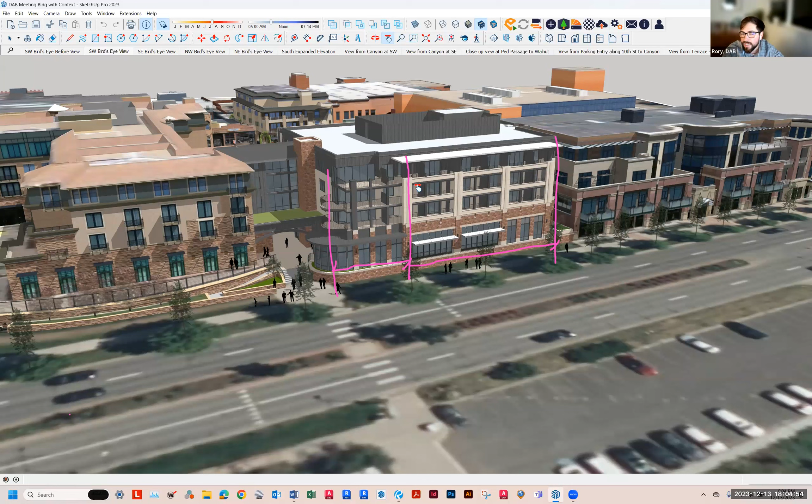I think for me, where it falls apart, the entire composition of this facade is the southwest corner. Once we get past the 3 strong bays that have a lot of structural logic, and there's quite a bit of proportional logic, I'd argue.

So each of those stories, story 2 and 3, if you will, technically 3 and 4 with the mezzanine, are kind of reading equivalent, as opposed to trying to drag something up and throw off the balance of the vertical layering here.

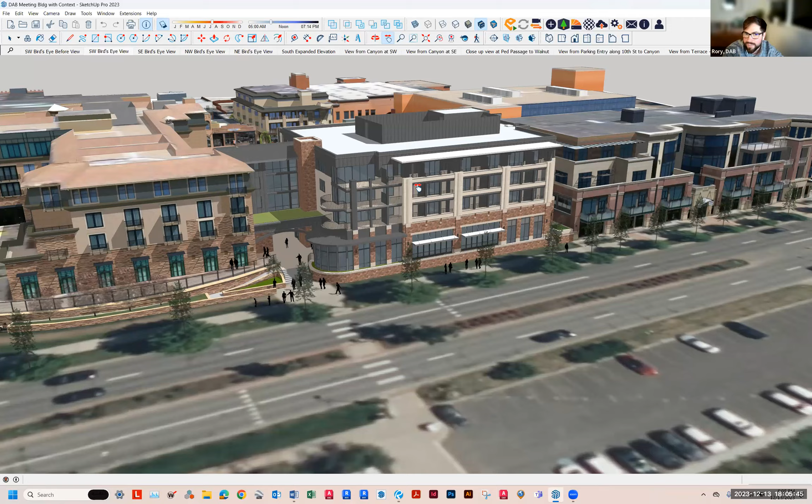But then we get to this, to the left of these 3 bays, and this just looks unfinished to me. There's no terminus on the roof structure. The railings change directions, they go vertical versus horizontal. We're trying to echo this round feature up into the balconies, which we're already talking about, this idea of it being exciting to lop off this round feature.

Because, even though we're calling that the 87'10 vertical facade, I would argue because of the columns and railings and everything that's going up to the left of it, it's actually much more like a 100 foot or 110 foot facade. And is there any ability?

I mean, it's all kind of pre-function space there. I guess there's one little bay that's inside of your actual civic ballroom. But if it was stepped back several feet, almost to mimic how far back you are on the east edge for where the egress doors are, it would further that move of this kind of outdoor space.

And it would honor Todd's earlier read of section 2.2, where we want to promote outdoor spaces that have public view to mountains and things. So now it wouldn't just be this kind of half circle outdoor gathering. It would maybe have some small patio space, 5 or 6 feet deep, that overlooked the sidewalk, and it would achieve further identifying this 3 bay 87 foot 10 facade as the limit of the extent of this facade.

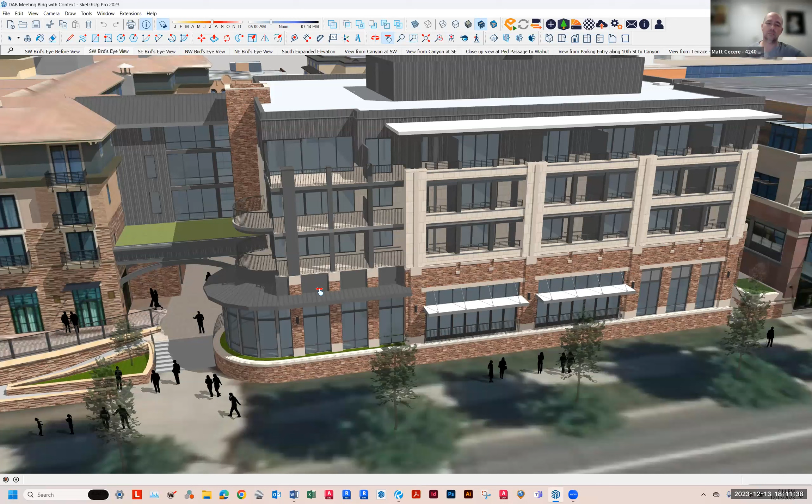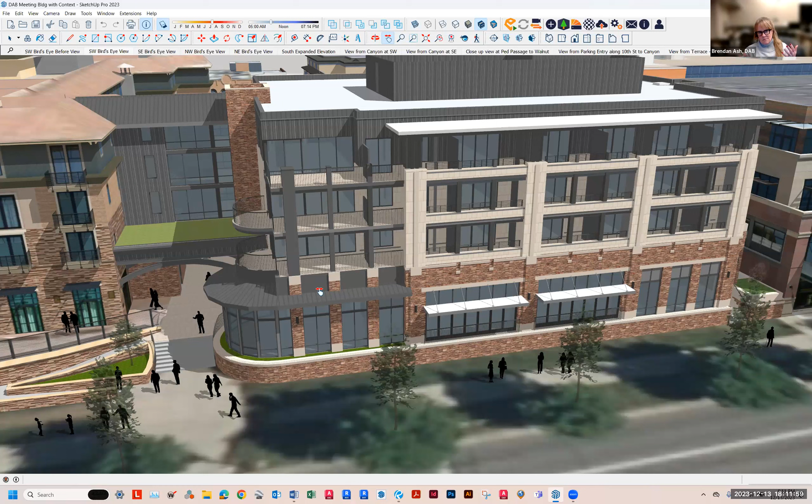I think also, continuing if we're going to keep going west, I think I would like to also address that bridge element. I know programmatically behind where zinc is, it's cool. I think that if it is followed through as to actually be zinc, which I know is expensive, it could be pretty cool. But I just wonder if the bridge element, it's again so different from the St. Julien, but it's kind of half tying into the architecture of this new element of the new building. I just wonder if it could be something totally different and unique, more glazing or lighter, or just something that signifies a connection to something existing, so that it could be sort of different. I'm not sure if the zinc is working on the end connecting to the St. Julien.

Yeah, the connection needs to be studied and detailed and celebrated maybe a little bit more. And I'm not sure if the stone coming up like a chimney is... I don't know, maybe that's...

I'm curious, why is that not just all glass? I mean, I understand they make mullion mates, and you can back paint glass if it's a storage room or something. But to me, the intent you got about halfway on this facade is to make it a transparent link, so that it becomes as light and airy and glassy as possible, and it lets the two individual facilities read as clear buildings.

What's unfortunate is actually the alley facade has the full glass treatment, and I don't know enough about the building to know if you could flip the stair and put that service window punch componentry on the north side, or if that's a function of existing hallways and existing vertical circulation. But even still, I think you could probably just glaze that whole facade and treat some mullion mates to get some partitions to interrupt it, and use back painted glass in some cases to kind of make it go away, just completely transparify it.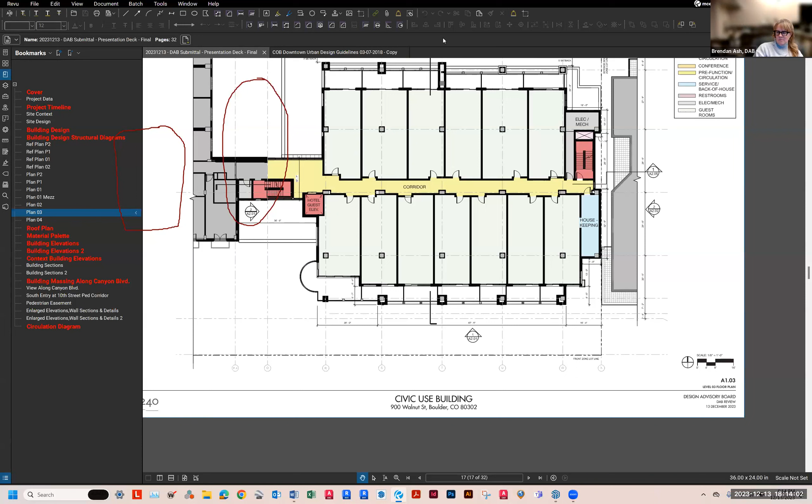Would you simplify the thought, if we did all glazing, if we had to have some spandrel in there to accommodate a space that doesn't want to be glazed, is that the language? Are you saying, it looked like there was a storage room that doesn't have the glazing. If the storage room could be relocated, or have some, not spandrel, but back painted glass or frosted something, like if you paint surface 4 but leave the other 3 surfaces transparent and pick a color that you almost wouldn't quite know you can't see into it unless it was night or something.

Is it possible to flip the stair to the north to preserve as much transparency from the canyon visibility, as opposed to the north facade here being buried in an alley?

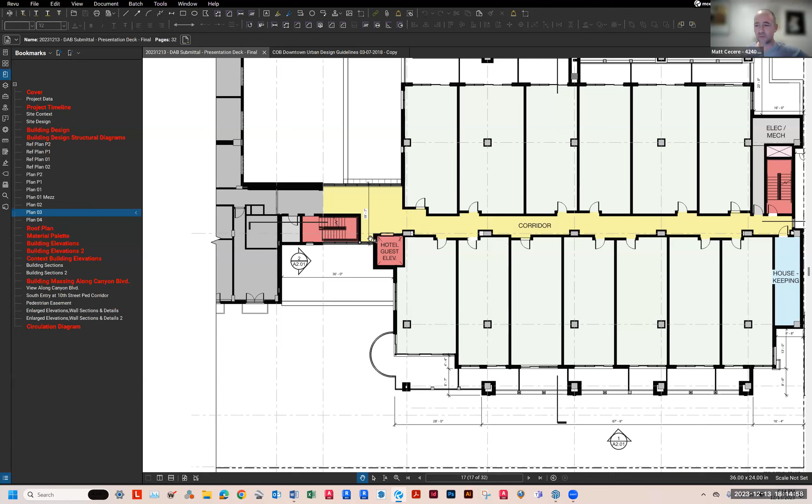Rory, if you could see Stu's face, he's probably smirking because we have looked at this bridge over and over again. It is a very challenging condition. We've looked at it so many different ways, and what we've tried to do is make it as transparent as possible, not celebrate itself. It's supposed to go away, not be part of St. Julien, the original building, or the annex. We did happen to use the zinc because that felt appropriate, but our goal is to make that facade go away.

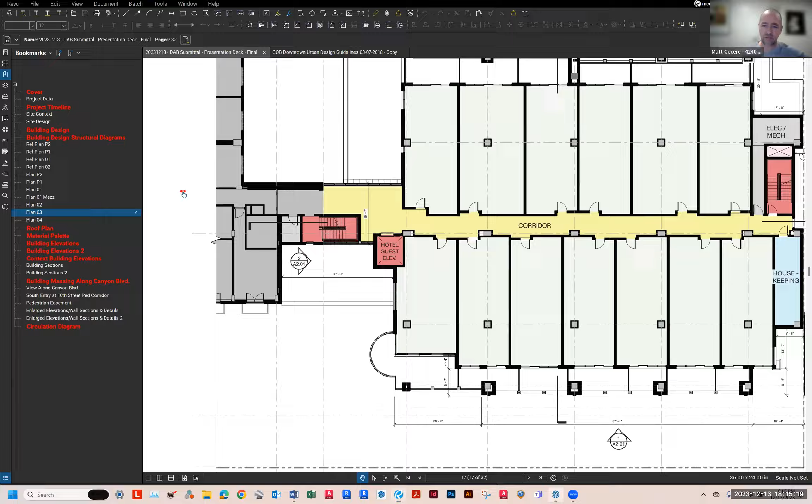So if we go back to this facade, to your point about getting rid of these horizontals, that's something we're exploring. Can we continue to expand the glass over? I think that's something we have to explore as well. Even when it comes down to the roof form, we have the standing seam metal roof that intersects the clay tile roof—that's something we're looking at to try to simplify as well. So all of those elements, you guys are onto something that we're concerned with too and trying to refine.

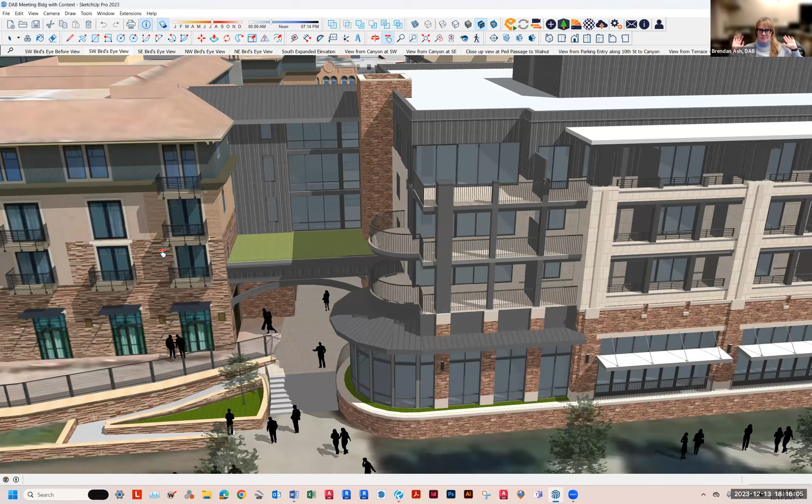And then the last comment I was going to make about the metal treatment is that it's the mechanical screening. I just wonder, if we're talking about some level of design hierarchy, if the mechanical screen deserves to have this really cool zinc material, or can it be something like a lighter metal that blends in with the sky a little bit better.

I think mechanical screens that are lighter in color and lighter materials can end up blending in and disappearing a little bit more. But right now it's in the hierarchy as prominent as the cool treatment of the facade. That might be studied.

So it sounds like DAB members are in agreement on how to approach this and what your recommendations might be. I feel like I need to summarize them so we can wrap this up. Do any of you want to try to summarize where we are? Because I'm not sure. So no new discussion until we summarize where we are.

I would say I can try, I'll attempt it. The 75-foot overall length is not particularly relevant in this circumstance. It's more about the balance between the massiveness and the structural issues you have. There seems to be a lot of agreement that really this whole thing is about creating this passage through here that's really great, and you've got to nail it. Right now it's kind of initial, over-designed, and it maybe just needs to get a lot simpler and more elegant.

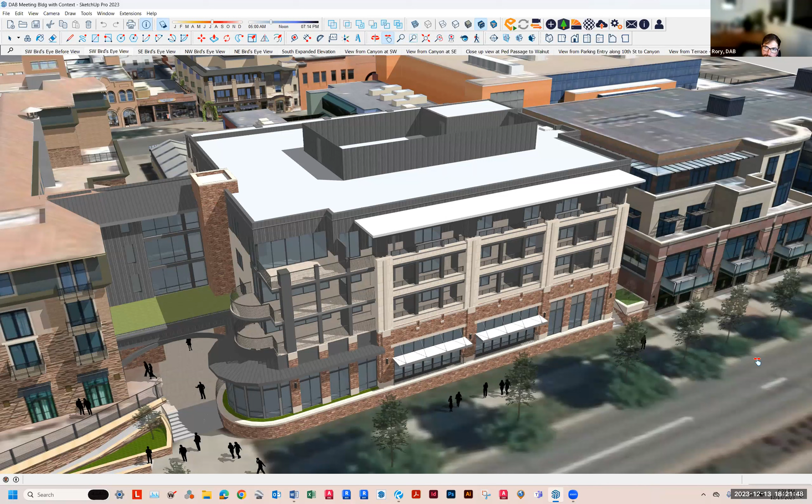So let me ask DAB members this: if they took the structural and design features from the rest of the facade to the east and applied that to the western corner, would that make it? No, the opposite. We're talking about shedding some of the architecture, mass, bulk, and fenestration from the southwest quadrant, from the southwest corner.

Okay, like even this overhang, right? Like if this was more Victorian, where it's just wrapping and there's no... these are kind of, you just got a lot of stuff going on, right? It's searching for one voice, and I think you guys get it. It's just where you're at. I think that makes more sense.

Okay, so let's stop there because we're now into the 6:20 to 6:30 range, and see if there are any other design issues that you all want to raise about materiality, or not to put any ideas in your heads, but is there anything else that we should talk about that's relevant to this discussion?

We got glass, there's 8 different materials going on, and it's simple. Yeah, the layer cake, the tendency for the layer cake buildings that came out of this whole development, I'm not sure has stood the test of time.

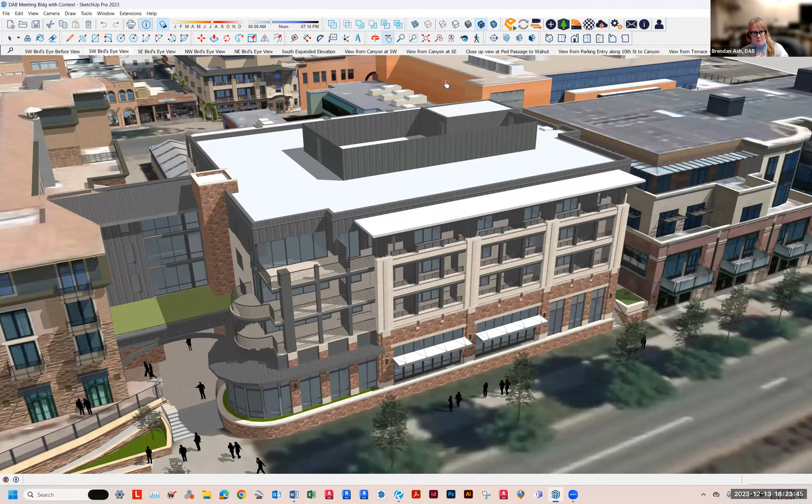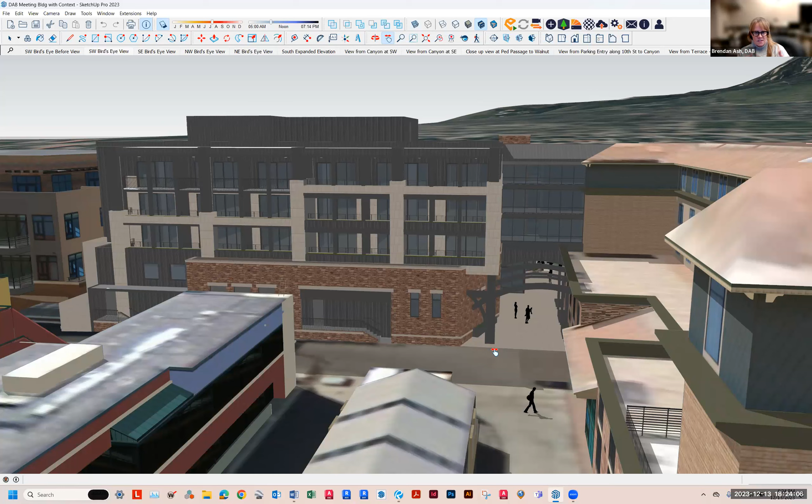Yeah, I think the last thing that I would like to add is that if you're looking at the north elevation, if you're going to have a lot of people coming in from the north, coming from the Walnut side, that corner treatment—I mean, I like the way that there's the angle, that it's like the nod to the curve. You have the angled wall that's directing you into this pathway and the arches, and I just want to be sure that the facade on the ground floor of the alley is not so back-of-house looking.

It's interesting—that's actually the visual terminus to the connection up to Pearl Street. You come down on the side of Bar Taco, straight shot through that precedent arch they were sharing, and straight down the Mall, you're just staring at this blank kind of receiving wall. Is there some way to make this like a visual terminus that's actually exciting and encourages people to use this? Because these little cuts through the city grid are gems, especially for bikers and pedestrians, to not have to skirt the entire block.

And to make these as inviting as possible—we get very few opportunities in the city to create these types of pedestrian links, so beautiful. I think you have to be really careful too, because 10th Street has the necessary evil of back-of-house for the St. Julien. I was just down there on Saturday, and it looks like there is a dumpster area for the St. Julien, but all the dumpsters were out on 10th Street, and delivery trucks and all that—10th Street is not a great experience.

So to make, like Rory said, the terminus of this pedestrian experience something that guides you into this civic center promenade, or whatever Stephen called it—passage—I think it's just important to keep an eye on that north elevation as well.

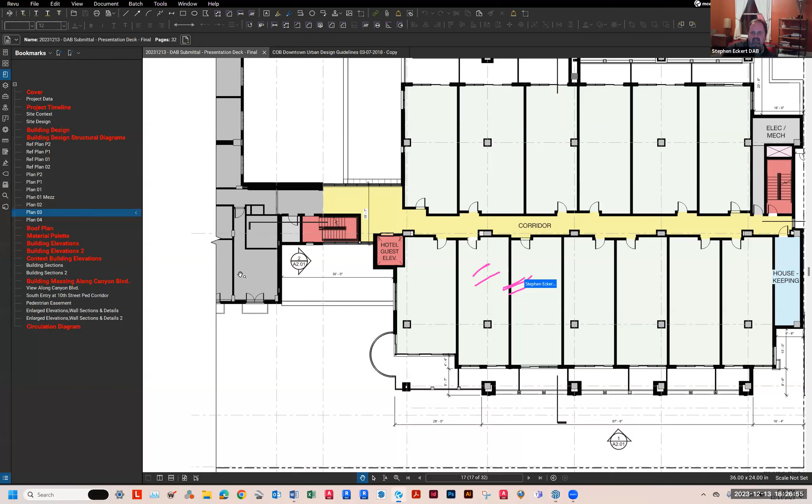Let me jump in here if I can, because I'm concerned that we need to tie these things to the specific criteria.

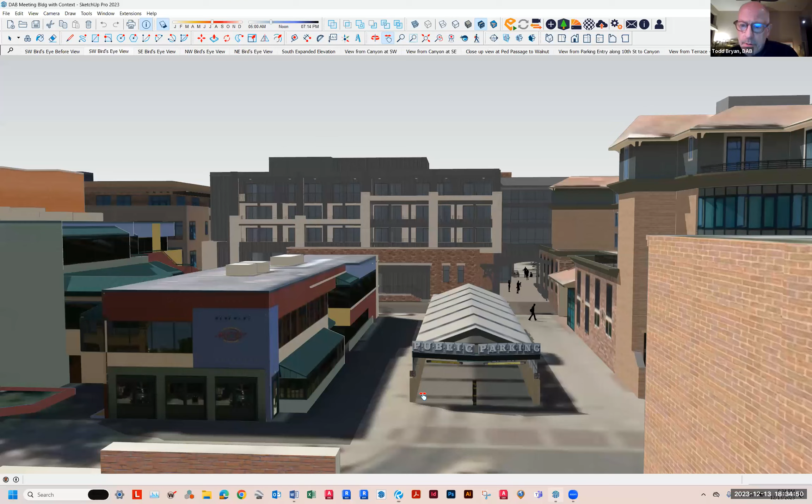One is views and the other is the mass and scale of the building, which includes whether it's too close to the lot lines, whether it's pushed too far up towards the canyon, whether the structure on top is intrusive, and whether there are ways to preserve their views through architectural design features.

But the question really is, are those two things relevant? First of all, are they relevant? Second, if they're relevant, then is there anything we can do as a design advisory board to address those things?

I think there was one suggestion that I had of changing the material of the appurtenance, the mechanical screening, to lighten that up so it doesn't appear to be part of the building and adding to its height. I think that addresses a concern we had in public comment, and I think the situation with blocking views is unfortunate.

I feel like that falls on the shoulders of the developers of the Arete. I mean, I don't necessarily think it's St. Julien's responsibility to fix the issue that was created in the development of the Arete.

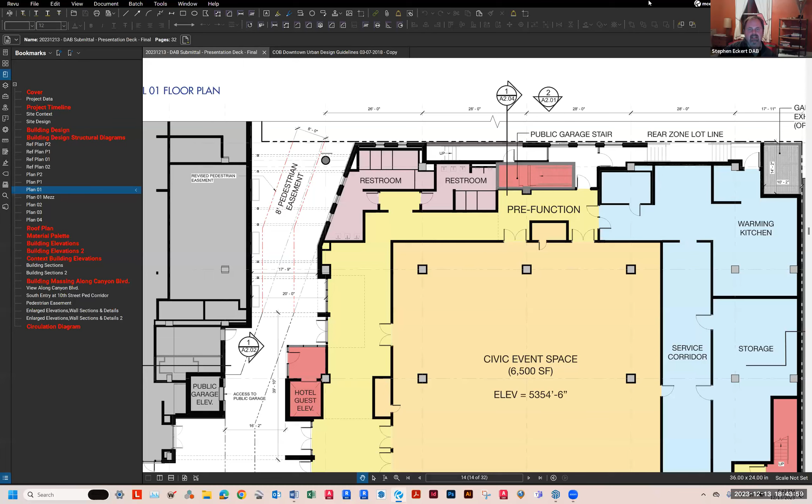When this building was built, there was always a potential that there would be a 4-story structure blocking those balconies. I would take it one step further - if we made that recommendation, it'd be a takings issue where we're saying as policy that the rules we have in place don't apply, and we should have some other standard.

And it would suggest that it's an arms race of development, that whoever builds first and most quickly, all of a sudden you have to now respect everything they've done. That's why zoning exists. They knew full well when they designed that building what context they were in. If anything, these people should be stoked that they got to enjoy those views for as long as they have, because it's been caught up in approvals and economic development.

I get it, it's a natural response to be emotional about the loss of an incredible asset like that. But to look at DAB to find something in the code, or even just express a personal opinion about how to preserve those views, I don't think this is the appropriate board nor venue for it.

I mean, I loved the deck on the West End Tavern, it's like my favorite place to go. There's a building totally blocking the Flatiron view. It's just, we got to enjoy that view for a while.

I'm glad you brought that up, because they did make concessions - they did make design concessions. So I think one of the things I'm sort of getting at is that we represent the community, we meaning the board.

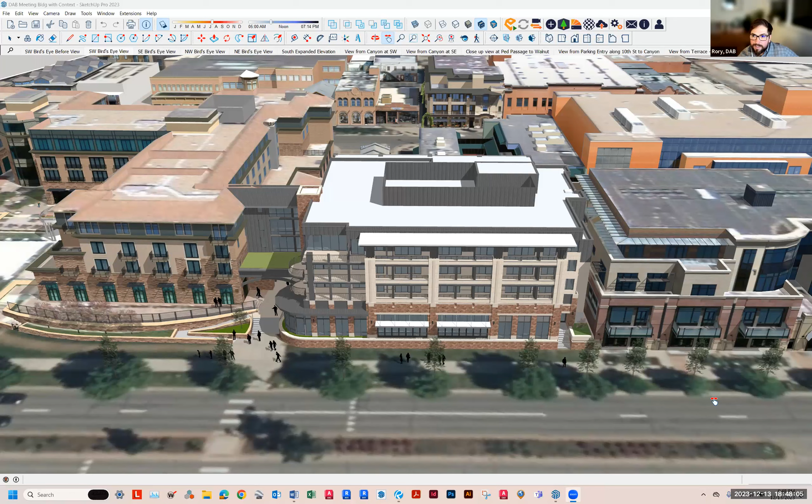And I noticed, Matt, when you were orbiting the model, that there's some little corner windows there. Again, I hate to open a can here. I realize that's a nice treatment for a facade. Architecturally, the corner light's going to feel fantastic, but these are maybe smaller concessions in an effort to demonstrate a commitment to addressing the context and the concerns of the neighbors.

How much benefit is that temporary guest getting out of that side window versus a full-time resident who now doesn't have nightly guests peering into their, what I assume is living room, on that corner?

Right, I mean, from an urban design perspective, these two buildings should be joined. Yeah, right, that's the right way to do it, is to join the two buildings. And the building, the Arete, should have been built to have that happen in the future.

Which two buildings? The Arete and the new tower could technically share the same wall. Yeah, they should be sharing a wall.

And Kalani, you had your hand up, and Jennifer had her hand up. I was just going to say, in general, for the board, we know that we've had other projects where there's a difference of opinion between either staff and the board, or individual members of the board. I think one of the best ways for us to record this when we get to the summarization point is, as we've always done, where most of the board feels one way, that's part of the recommendation, but we've noted that there might be a difference of opinion within that summary too.

Yeah, fair enough. Important to just, when we do the summary, think of that too, Todd, as far as we want to be able to acknowledge the voices in the room as part of that.

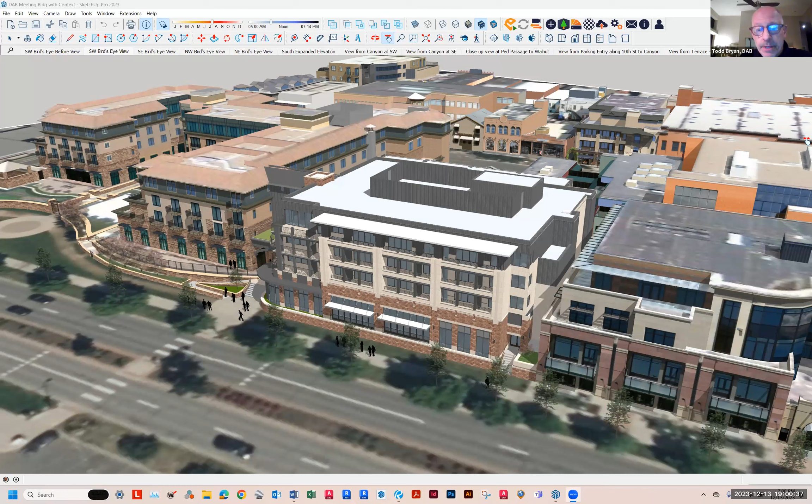So Todd, I think that the last piece goes with the first key issue you just mentioned. It's like a part B of the first key issue. It has more to do with the public realm interface. Public realm interface, okay, which is the first. With the first issue we discussed, so that would fall under the site review criteria, H3A.

Correct. Okay, so it's continuing the discussion from Canyon to the west face. Right, yeah. Did I miss anything? No, I think that's pretty good. Okay, and we can tune the meeting minutes when we see them to make sure we get the verbiage straight. I'm surprised that I didn't, but I think we covered everything that we set out to cover.

Matthew raised a question early on about talking about the alleyway, and we didn't really talk about that. Well, Todd, we did, that was this add-on issue. Okay, all right, when I was referring earlier, we got to it, and that was my concern with approaching the site from the alley. Okay, great, so I feel satisfied that it actually got covered quite thoroughly.